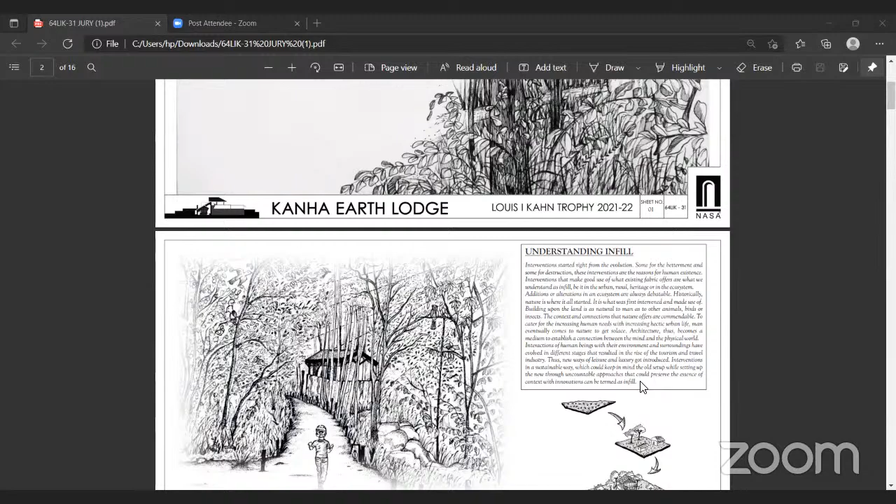Also, the site as an intervention proved to be for the betterment of the ecosystem there.

The reserve forest later got named the Kanha National Park, which led the government to launch schemes for tourism and bring awareness amongst people about endangered wildlife species and the forest. This led to the emergence of several habitable spaces in the buffer zone, amongst which the Kanha Earth Lodge stands as one.

This area lies in the tropical dry region with moderate climate. The humidity can be seen high in August, followed by more precipitation, which is observed in July.

Next, talking about the topography, the site is located on undulated land with minimal but gradual slope in the buffer zone of the Kanha National Park.

Before the construction, the land was barren and was used by cattle for grazing. But today, the site bears over 1,000 different kinds of tree species.

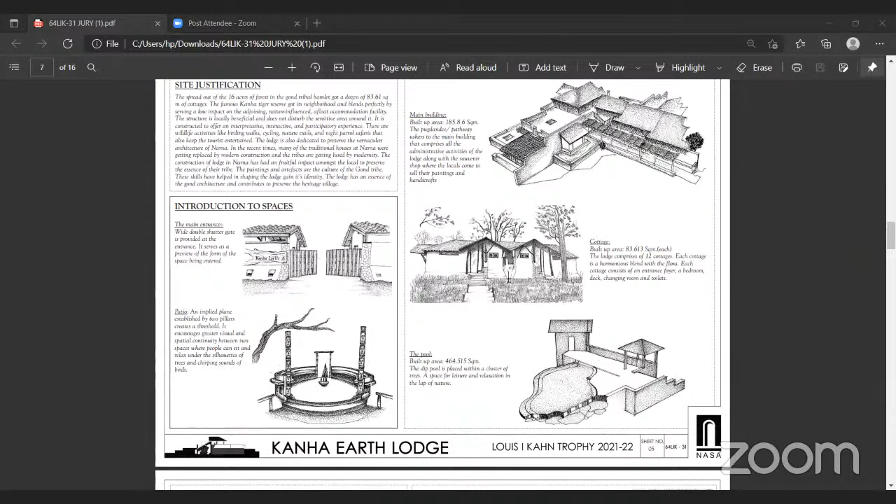The cottages, whose built-up area is 83.613 square meters, the lodge comprises of 12 cottages. Each cottage is a harmonious blend with the flora. Each cottage consists of an entrance foyer, a bedroom, deck, changing room, and toilets.

The pool extends up to 464.515 square meters, the dip pool is placed within a cluster of trees, a space for leisure and relaxation in the lap of nature. Coming up to the main building, which is inspired by the topography of the site

and followed by the principles of minimum cut and fill. The physical form of this building is not dominant but blends well with the surrounding. Here, the spatial organization shows a relationship between organic and inorganic spaces.

Space which is within a space, or spaces linked with a common space or adjacent spaces, shows this type of relation.

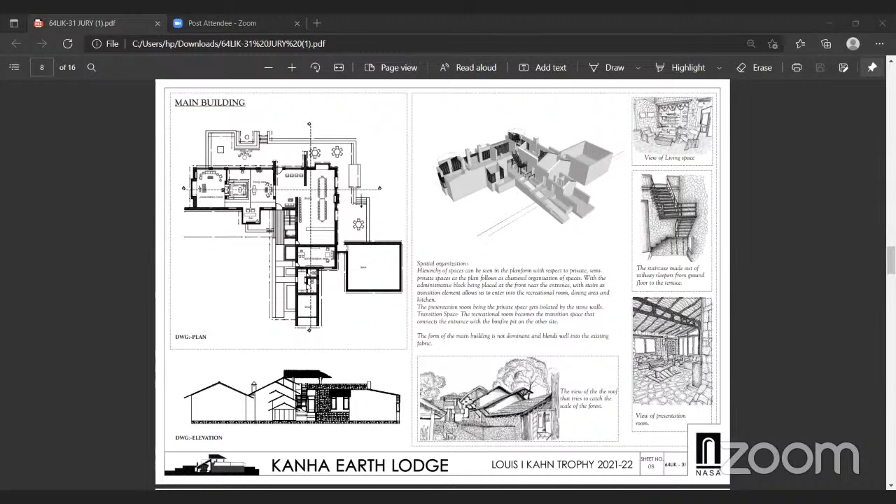Here, there are horizontal, vertical, and sloping planes, which include walls, floor, and roof. Starting with the horizontal plane, which is the floor where it is being covered with stone.

Specifically, yellow sandstone is the material used for the final flooring. These roughly cut stones arranged randomly give a better look. Rather than being uniform, the floor is terraced or spaced to create a differentiation between the spaces.

The vertical plane, that is the wall, is of three layers: the brick, plaster, and the oil paint layer. The sloping planes of the roof also have a series of layers constructed in a manner to protect the interior from exterior intruders.

Coming to the cottages that are 12 in number, they have a prominent feature of sloping roof that welcomes the users, and also a feature that can be seen in the houses of the Gond tribes.

The material palette is same as the above, with the strategic use of strategies starting from orientation. 6 of the cottages face the north side and 6 towards the west.

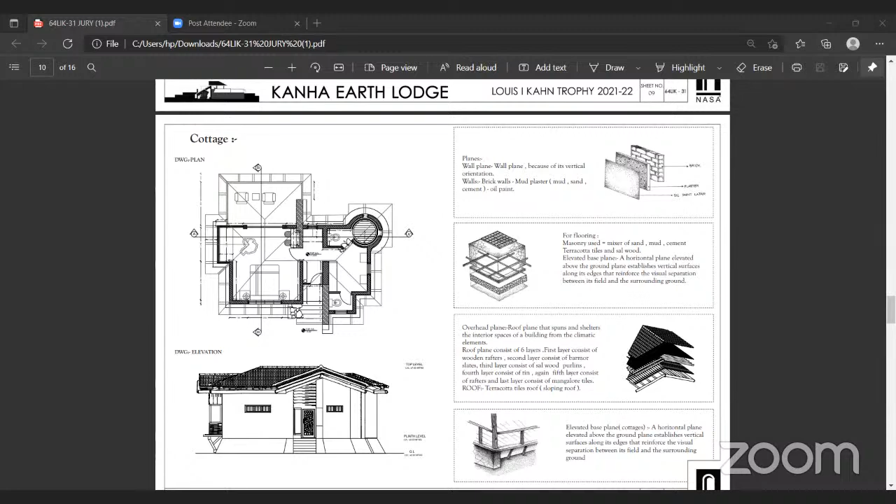This was strategically planned so that each cottage gets the view of the lake. And the harsh sunlight coming from the south and the southwest is cut off by strategic plantations of bushy trees. So the abundant vegetation on the site itself takes care of most of the challenges related to the climate.

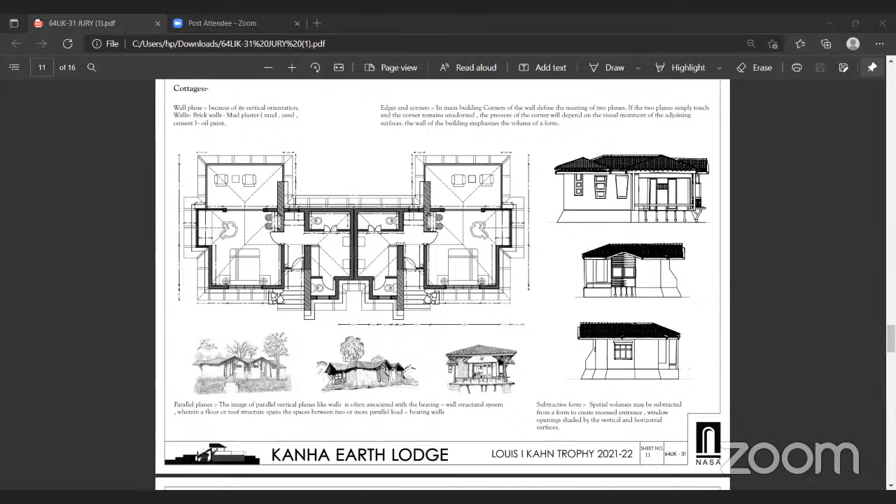The use of recycled materials and materials borrowed from the villages nearby symbolize the vernacular traces in the modern building.

Similar to the manner in which a shade tree offers a sense of enclosure beneath its umbrella structure, an overhead plane defines a field of space between itself and the ground plane.

The structure includes two types of garden, the butterfly garden and the kitchen garden, which is used for organic farming and providing fresh veggies to the guests and the locality.

Here are some of the construction details.

Moving on to the rustic richness of the materials and the blending form with its context, it serves its purpose of luxury as well as solace, and also it stands as a landmark.

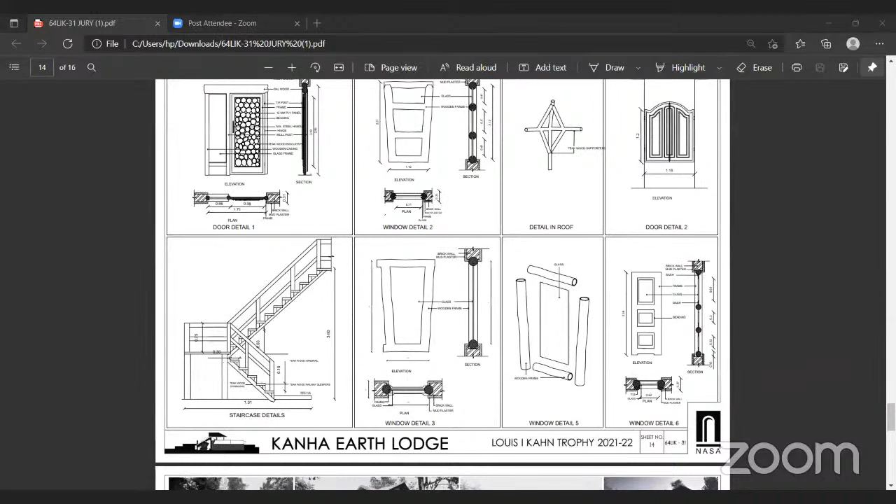We can actually see the RCC construction overpowering the actual essence of the village, but following the grassroots with new innovations could give a sense of novelty and familiarity.

We always talk of including nature into the building, but nature as a context is already there. It is the reality that the building has to face.

So the Kanha Earth Lodge not only respects the context, but also serves and aims to preserve the natural context and the vegetation, the wildlife, and the community that it represents.

So we sum up our idea of infill and conclude our presentation. Thank you.

So we'll start with Brinda ji. Okay, yeah, I wasn't sure. All right, thank you. Thank you guys.

Nicely represented project. What I really liked about the way you presented it was also acknowledging certain factors, like how the RCC overpowers, but yet there are all these balancing elements that are very contextual and responsive to the local culture as well as the forest and the area where it is located. So recognizing that was really significant.

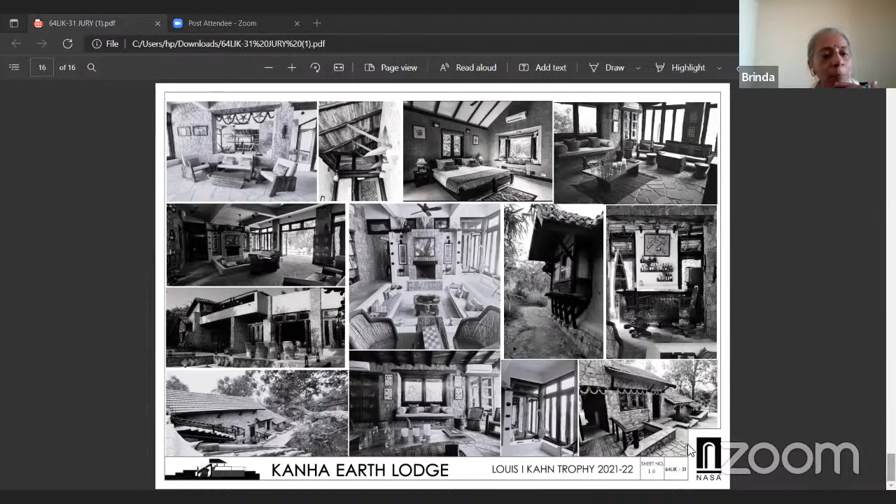Other than that, I've been fairly consistent about asking this question, which is that when you talk about the local culture, are there any other references besides small things represented through decorative features or some other things? Are there any other spaces which are, from a typology perspective, representative of the local? That was the only question I had. Thank you.

So now Parul ji. From the construction technologies, if you could just elaborate a little bit on the walls. You said something about it, but walls and windows, I think they have used all local wood. It looks like it, and roof ceilings, because this is really a very good project selection, as I would go and say that. And it's very well represented by you. Congrats for that. Doing a good job.

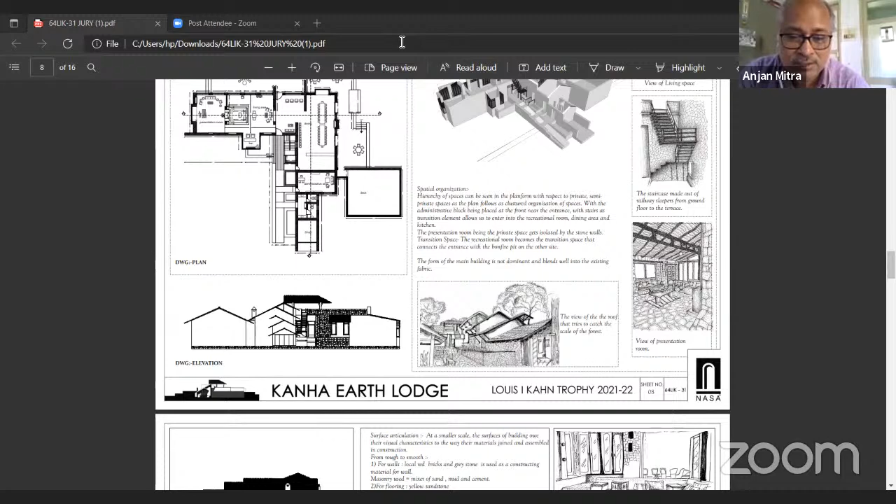And the rest, probably the kind of motifs, because all these tribal cultures have a belief system, and that is normally executed in various doors, windows, motifs, the way they use their utensils, the furniture, the way they actually serve food, and all that. So everything has a purpose. There are some indications that you have already thought about it, and also the name of the local species that they have used. That would have been much more of an interesting repository of tribal cultural knowledge. I think this is a good job.

Thank you. Thank you for the comments. I'll start by answering your question, sir.

The basic idea of the architects Padmaja Srivastava and Deepak Srivastava was to incorporate the Gond community, not to let it be overpowered. So they had this thinking process that the lodge should have certain character to it which will represent the Gond community itself. And also in the construction process, the locals were involved.

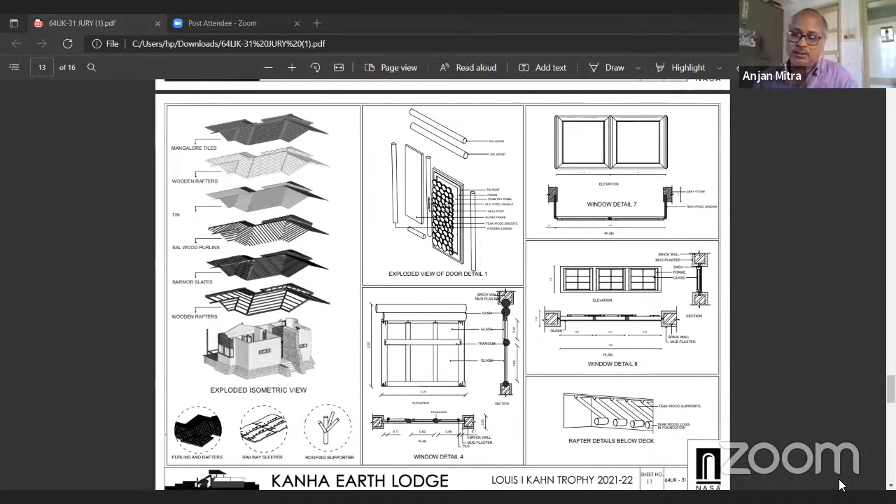I had just one more question regarding the tribe. Did you get a chance to look at any of their settlements?

Yes, ma'am. We did go to the locals' houses, so we got to study and physically document the traditional Gond house. We also provided it in our slide. The house we documented in Narna - this is the actual house there. And you see here, the slope of the roof is much more pronounced, and it is tiles.

Yeah, so this is exactly my point, because the profile somehow doesn't look very authentic or towards the natural profile. That is the only observation that I have, nothing else.

Yeah, but I think when you are dealing with hotels, they do want a lot more safety than just that. And when you're in a national park, I think this would also be a client requirement, I guess.

One more thing I want to say is that whenever you do something like this in rural areas, it really boosts the economy of that place. Not only do these people get employed while making the building, and more of such buildings will come up, but also many times they are employed by the hotels and resorts themselves. That has been our experience - the 5 to 6 villages around that place really start prospering.

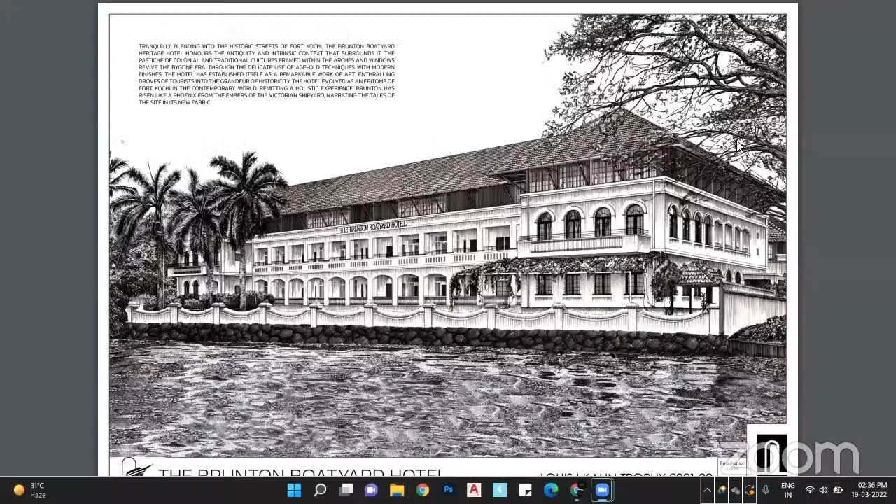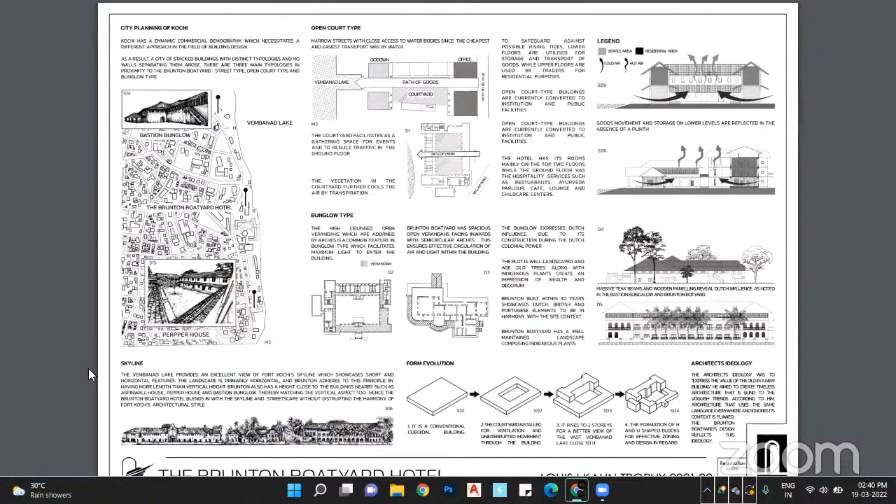Brunton also has an open courtyard type plan. Open court type plans or buildings also show goods on a ground floor, while upper floors are residential in purpose. Brunton also has its residences on the upper floor. The next typology that influenced was the bungalow type, which brought the open veranda and well-landscaped exteriors, which are clearly reflected in Brunton.

And now speaking of the skyline, this site primarily has a horizontal landscape, and Brunton adheres to the site's visual balance by blending along with all the buildings close to it, such as the Pepper House, Aspinwall, and so on. And speaking about the form evolution, from a conventional cuboidal plan, it incorporated a courtyard into its design. And then they raised a two-story to get a better view of the vast Vembanad Lake in front of it.

On the next sheet, we move on to our site. The site is highly accessible from all the transport hubs, and the building has been designed according to the climate of Kochi, which is a warm and humid climate.

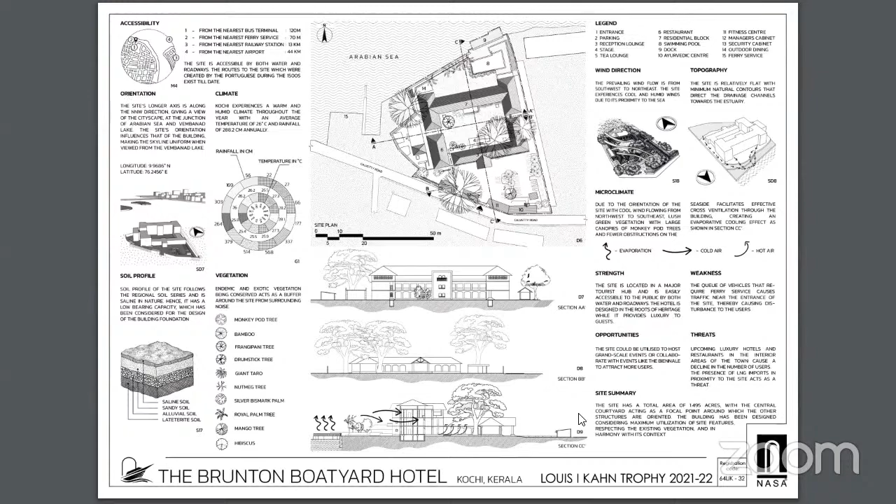The vegetation present in the site influences the microclimate by channeling the northwestern breeze. The site also maintains the monkey pod trees, which were planted by the British, and is also home to various animals like peacocks, cranes, seagulls, and squirrels.

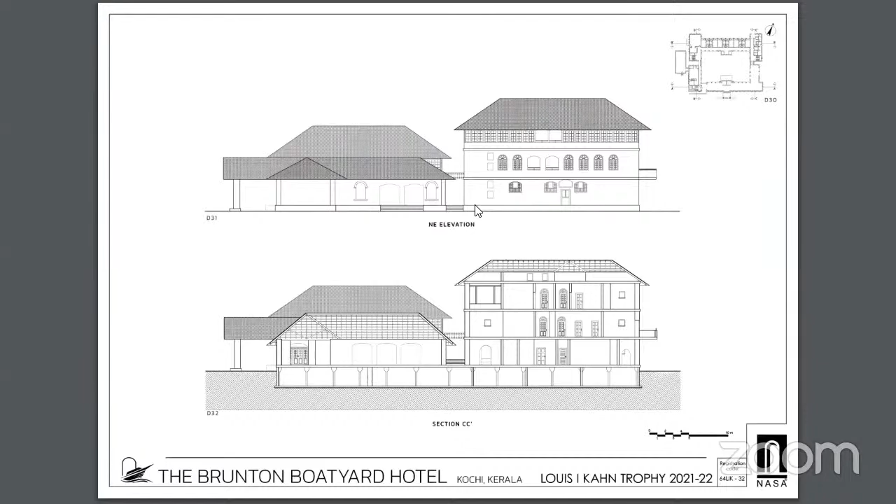Speaking about the construction details, the building has a 60 centimeter thick wall on the exterior and a 25 centimeter thick wall on the interior. The large thickness is provided to give a thermal lag to the high temperature outside.

They have used a slab and drop column for the foundation, which increases the punching shear strength and prevents the failure of the floor.

For the flooring, they have used terracotta tiles and red oxide skirting. These tiles can withstand a lot of stress by resisting breaking and chipping.

They have used arches as well, specifically Dutch style arches, mainly segmental arches and round shaped arches. They have used semicircular arches in the fan lights of doors and windows. Segmental arches are used in the facades and the entrance portico.

Then they have used lowered windows, which is also Dutch style, as we mentioned earlier. Then there's a roof structure.

The roof uses mainly two kinds of trusses, king truss and queen truss. The king truss is used on the lower floors, while the queen truss is used above because it has a wider span.

They have used cast iron expansion strips to compensate for the expansion that can happen to the building due to moisture, to prevent cracks from forming. They have also used soundproofing to shield it from unnecessary noise, as it's near a jungle.

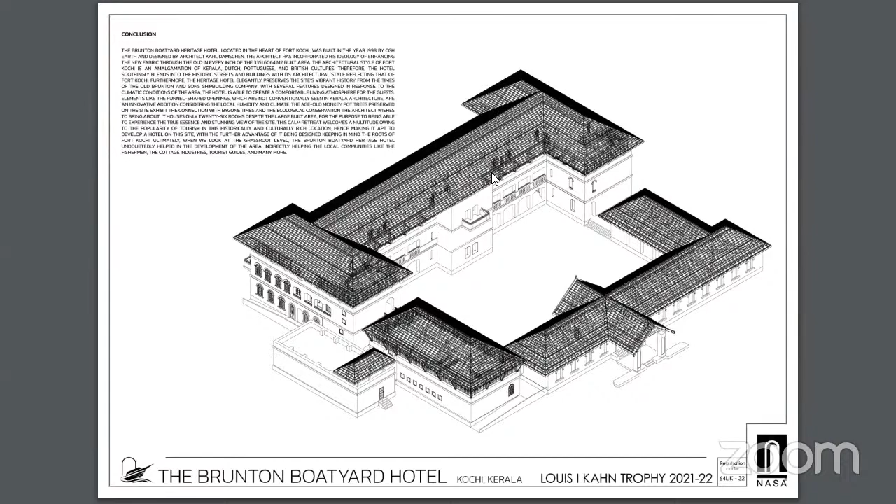The moment we stepped into the lobby, we were transported back into the colonial past. It felt as if we were not in a bustling town of the 21st century. We could learn about the importance of infill architecture and how a building does not have to be completely unique to be remarkable. When we look at a grassroots level, the Brunton Boatyard Heritage Hotel undoubtedly helped in the development of an area, helping the local communities.

Thank you, sir. Thank you, sir.

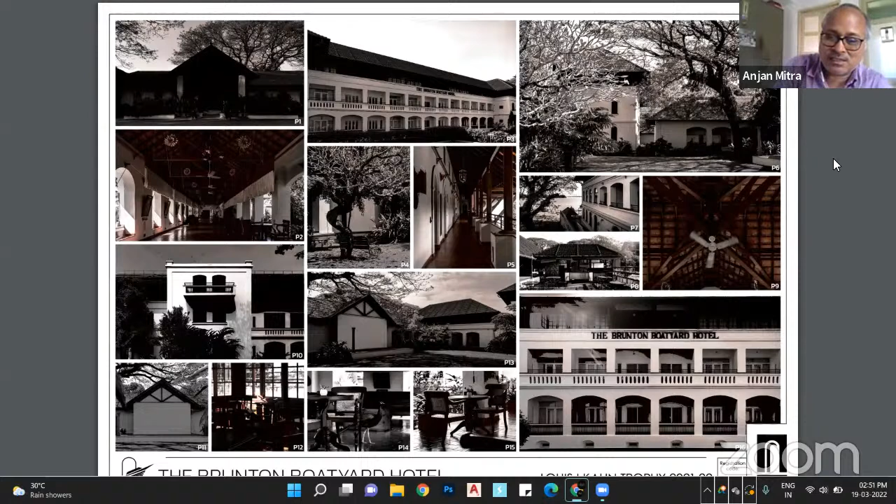How have they tried to cope up with new trends like the AC or other services, that intrusion that has actually gone into a heritage fabric? Even the lighting and electrical systems, these things were not there originally. So how have they incorporated that within this very strongly defined heritage fabric? This is something one needs to know, because these will be the yardsticks for the future of architecture. So I'll just stop at that.

Thank you. Thank you, sir.

Okay, nice building, and I think good representation. Most of what I wanted to say has been said. I have just one more thing: did you manage to see this? I'm sure you would have, but when you were documenting this, did you see this building from the water side, like from the lake side, and understand how it contextually fits within the skyline?

I'm sure you've seen it many times, but I didn't see it represented in your drawings. So I was just thinking that might be another way of looking at contextual representation of this, or rather the contextual kind of fitting of the insert within the skyline of the place. It might give you a slightly different way to strengthen what you're saying about the building. It's definitely fitting in very well, and we all know it, we've seen it. So I guess that part could have helped you by stepping away and looking at it from the water. Okay, that's it.

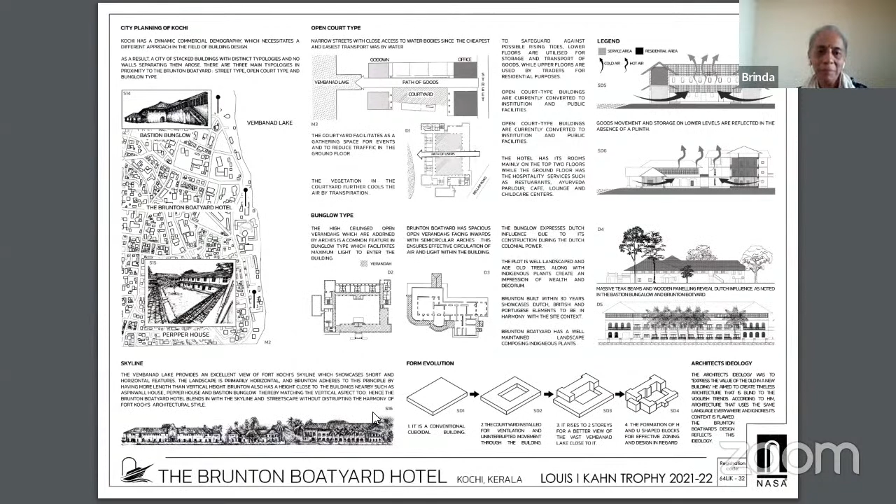Yes, ma'am. Speaking on the skyline, mainly if you see from the Vembanad Lake side, all you can see is a horizontal aspect of it. There are no vertical huge skyscrapers or anything. So mainly what the architect focused on was bringing these aspects. If you compare it with buildings close to it, like Aspinwall House, those buildings are majorly horizontal in structure. They have even incorporated that large sloping roof, a Dutch feature, to conceal the top floor, so it just looks like a straight horizontal line.

Okay, thanks. Hope I answered your question, ma'am. Yes, thanks.

Next, about the changes that occurred in the hotel according to the times. Actually, when the hotel was designed, it did not have soundproof rooms because beside this hotel there was a ferry. It was a Jangar ferry before, but later they transformed the Jangar into a Roro, which could move both forward and backward. The Roro was really loud, and that was a disturbance to the residents of the hotel. So, in order to cope with the sound level of that time, they introduced soundproofing to the walls so that residents could completely enjoy their stay without disturbance.

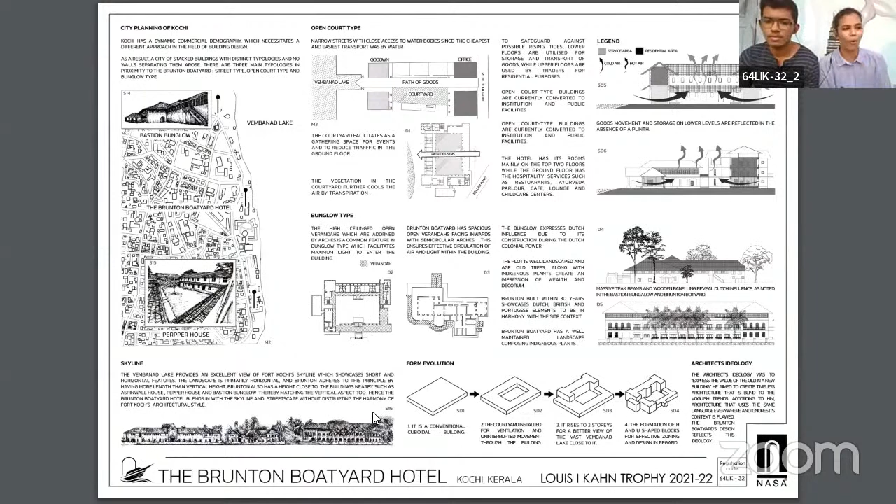Yeah, that's true. And the ego of the architect is not established here. The style is not established here, which is part of our Bauhaus traditions and modern architecture and postmodern architecture traditions. Yes, ma'am, we don't want that. We just want to show that it's here. Yes, ma'am, and look at the harmony that it has maintained. Isn't it nice and pleasing to be around this place and walk down the streets or even go on the boat ride? What does it feel like going to other cities where you just have one skyscraper competing with the other, and you have a nice low traditional building, and then a glass box that heats up like a cold tea, where you first heat it up and then you cool it.

Yeah, this is so true. Yeah, and even the verandas, they're so nice. Actually, when we were there, there was no soundproofing and I did not mind. We stayed there for 2-3 days. But I know, especially when people come from abroad, they have issues with sounds.

Actually, in our first cover sheet, we've taken the view from the lakeside. When we met the architect, he mentioned that while designing, during the initial stage, he viewed the site from the lake side so that he could get an idea of how the building would fit into the site and into the context. So this is why we thought of including this view in our cover sheet, because it's a really important view for the building.

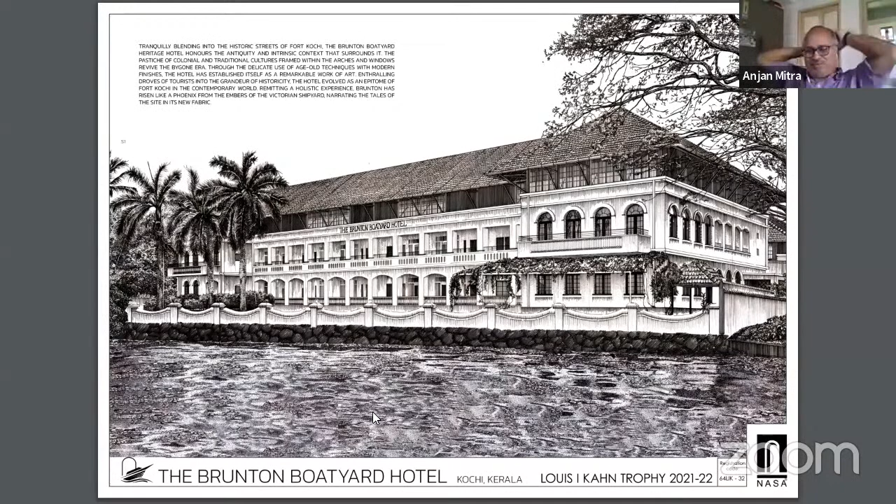You started with this, I clearly remember, but when you were explaining the building, you didn't go back and look at the details of the building again. That would have completed the thing. No, but that's fine. You explained it. That's fine.

Even the furniture and every detail in this building goes back to colonial times. Yes, ma'am, there are actually old fans called pankhas in the lobby, which are reminiscent of British colonial times. There's a picture, I can see Parul is so nostalgic.

Yes, and especially to find something like that, we did not expect it to be. We had not seen any previous views.

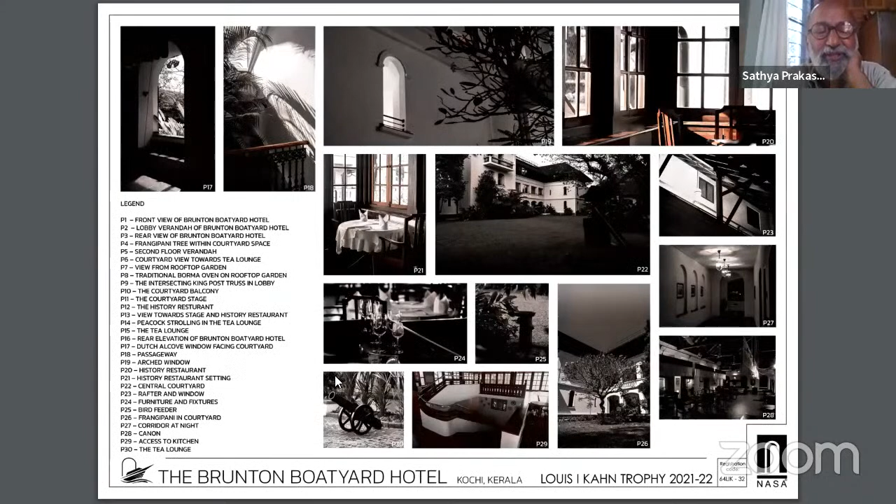Incidentally, while some of you are discussing, I was quickly checking out this architect, and I've heard of so many of his projects. I've been to two of them, the Kashi Cafe and another one, but I never knew it was this guy. I knew it was done by a foreign architect, but never bothered to find out who. Same CGH group, amazing work.

Amazing work. I mean generally, I'm not referring to your entry, student, I'm referring to his works in Kerala. The sensitivity he's brought, being born in Switzerland, Germany, and finally what he brings to Kerala, that's really surprising, which is rare. I guess, Satya, it has to do with cultural sensitivity, because he came from Switzerland and this is almost like a Dutch building.

Even the imagery of this thing, if you really see the first shot, it's almost like a ferry, you see the float and other things, it reminds you of that, the length and spread of the thing. It's almost like... but there are other projects of his. Of course there were some colonial hangovers, but there are other projects of his which have a character that is equally rooted in the local ethos.

No, that is it, the Kashi Cafe, blended it well. Yeah, he's blended well, and he's done a lot of restoration projects also, the synagogue - I've been to the vernacular, the Cochin synagogue, the Kashi Cafe and all. So it's now really I'm connecting in a different way, if not like the way Parul did. Anything more on this?

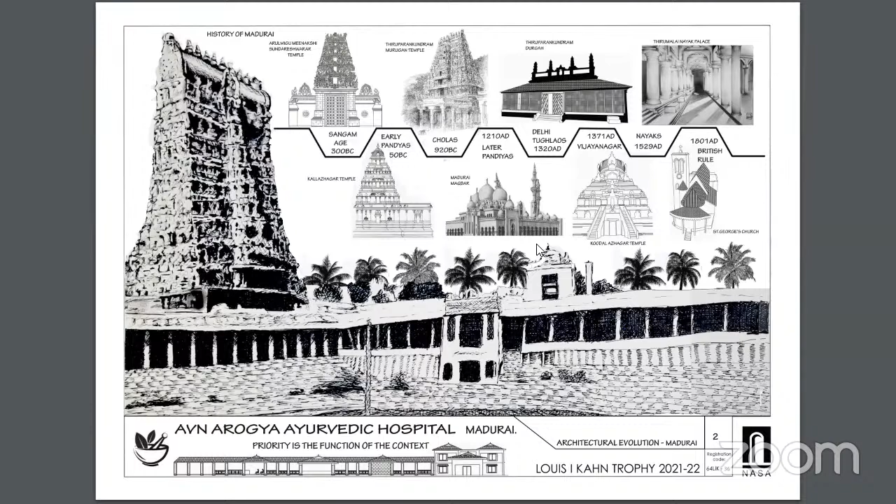Next, the brief interpretation: after globalization, the construction industry has developed in an incredible way, which gives us spectacular heritage buildings that must be conserved now. Most buildings in the conservation area are facing a dramatic situation. On one side, heritage buildings should keep their architectural, historical, aesthetic, as well as social values, but on the other side they must be developed based on real market demand. Infill building should be the solution in making a respectful contemporary contribution to the conservation area. Infill building is based on the sustainable conservation approach, so the development solves not only physical problems but also non-physical ones.

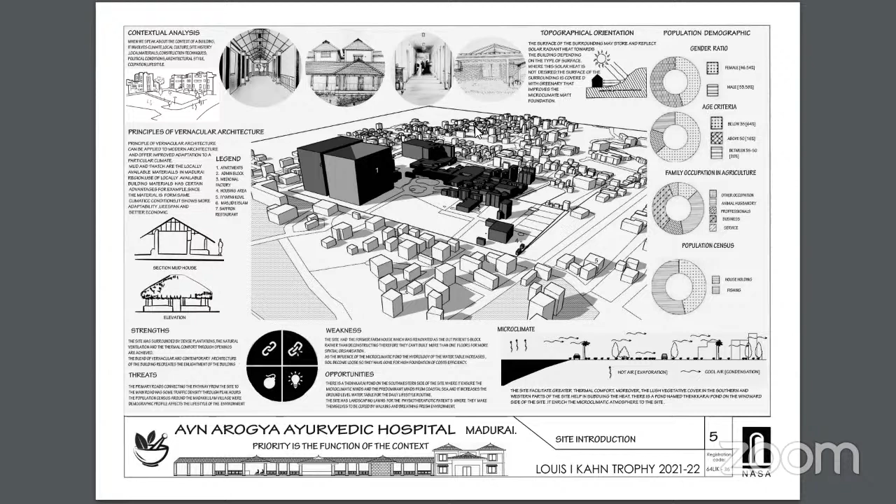Site introduction. The AVN Ayurvedic Hospital is situated in Madagulam village of Madurai South Taluk. It is an Ayurvedic hospital and science medical center of this locality, a complex comprising various buildings with varied characters, each having their unique essence and serving different purposes. They have developed this site with lush vegetation and sustainable techniques of approach to the site-rich context.

AVN is the evolution from phase 1, 1920 to 1970. It started from this Varior community. People from this community were involved in Ayurvedic medicines. In Kerala, there was a college named Ayurveda Padasala, where Rama Varior did his college studies in the 1920s. After he came to Madurai, he rented a house on Town Hall Road.

The house was designed such that the ground floor was his hospital and the first floor was his house. His wife used to prepare medicines with Rama Varior's guidance. With those medicines, the couple started the clinic and the pharmacy.

Phase 2, from 1970s to 2010. At that time he came to know there was a 15-acre site in Tenkarai. He decided to shift to Tenkarai, a rural place with nature, connectivity, and peacefulness. Being Rama Varior, they were not satisfied having their clinic in the heart of the city; they wanted a site well connected with nature, doing justice to their profession.

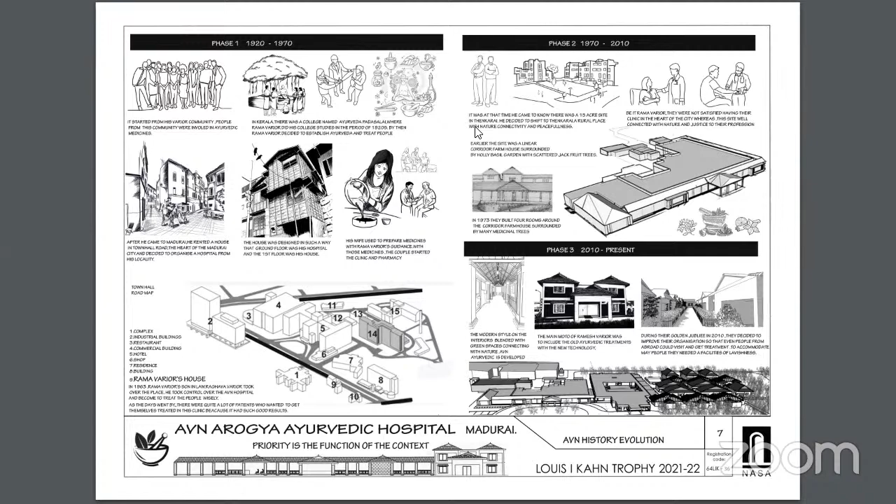The main motto of Ramesh Varior was to include the old Ayurvedic treatment with new technology; he wanted to give it a modern touch. Likewise, he designed the building to be contemporary architecture with a lot of modern architectural styles, blended with greenery spaces outside. The building has a lot of open spaces connecting with nature. So this was how the AVN Ayurvedic Hospital was developed.

Admin block. The total structure comprises specialized doctor's cabins and combined consultation rooms. They have segregated the semi-public and public zones by the method of an open courtyard, where the climatic impact results in the building's functionality. It acts as a node of interaction, like an open-air theatre, to hold functions and to fill the gap of mental health.

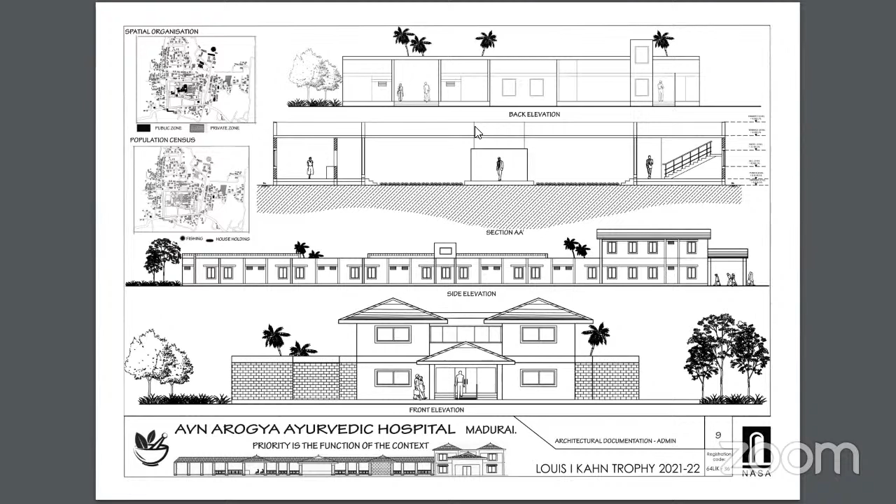Cottage 1. This cottage is influenced by both vernacular and contemporary architecture. The spaces flow from public space to private spaces, while the outside space at the entrance, surrounded by the landscape, is inspired from vernacular architecture. A seated space is provided as a cross-reference to the Thinnai in vernacular architecture.

You still have 2 minutes to finish your presentation.

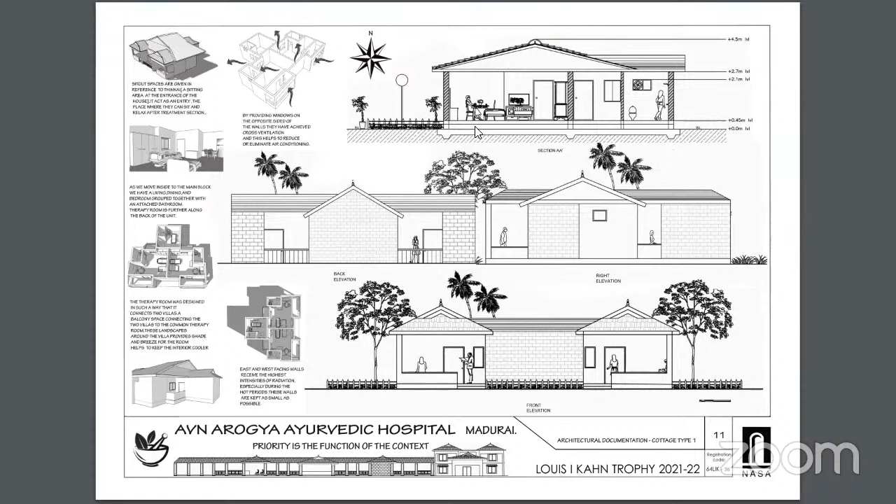Sustainable techniques: materials used were locally sourced, making use of skilled local labor. At the site level, they have gone for solar panels and rainwater harvesting methods. At the building level, they have used Mangalore tiles and bricks. Bricks are made from the site, naturally brought from the nearby village, and the roof tiles were taken from existing farms on the site.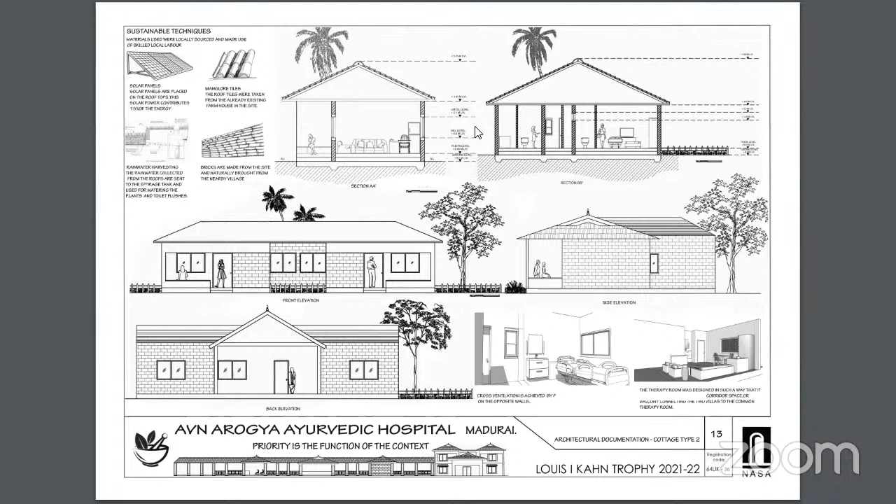Cottage type 2: they have a royal suite villa where customers who need privacy and individual space can stay. The touch of modern architecture is seen as the thatched roof is replaced with a sloped roof with Mangalore tiles, the false ceiling with an RCC slab, and mud walls replaced with bricks, and so on.

On site, they have constructed using a traditional method. The mortar was produced with traditional chuna, with the stone rotated by bullocks, and lime pasted walls. Walls with thermal insulation provide soundproofing materials, giving a sense of solidity and permanence to the structure. Next.

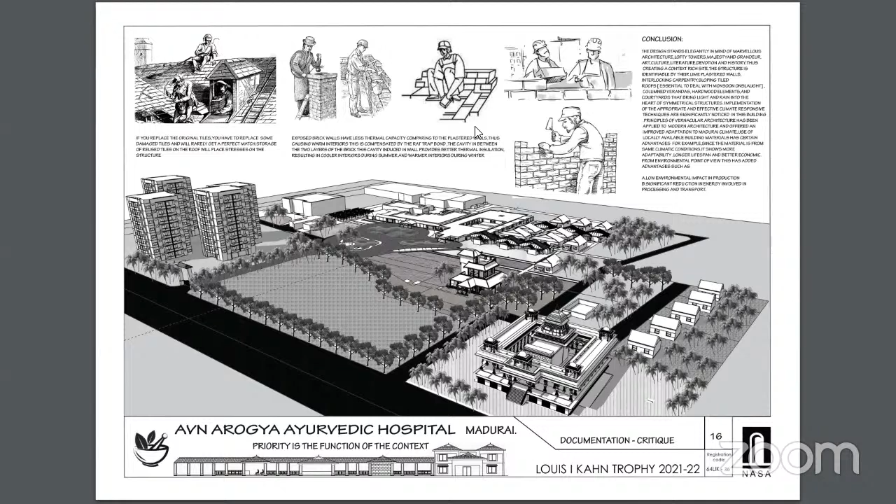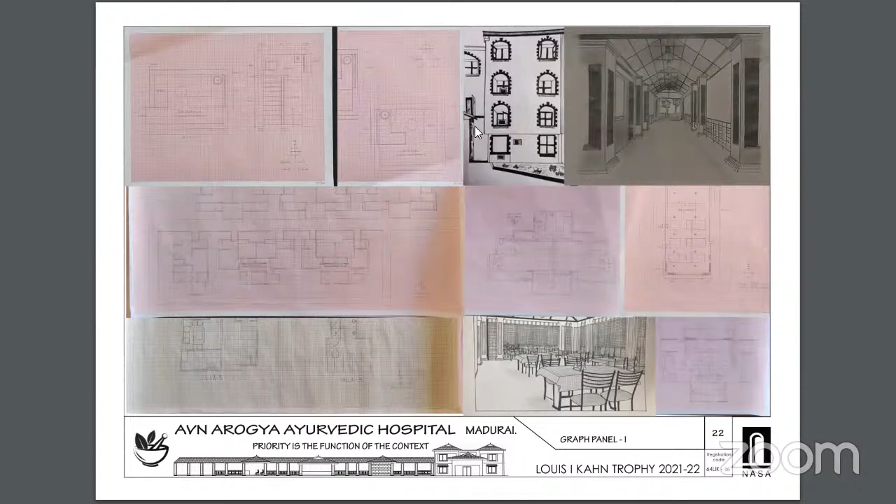And these are the documentation sheets where you have sketched on site. Thank you. Thank you, sir. Thank you.

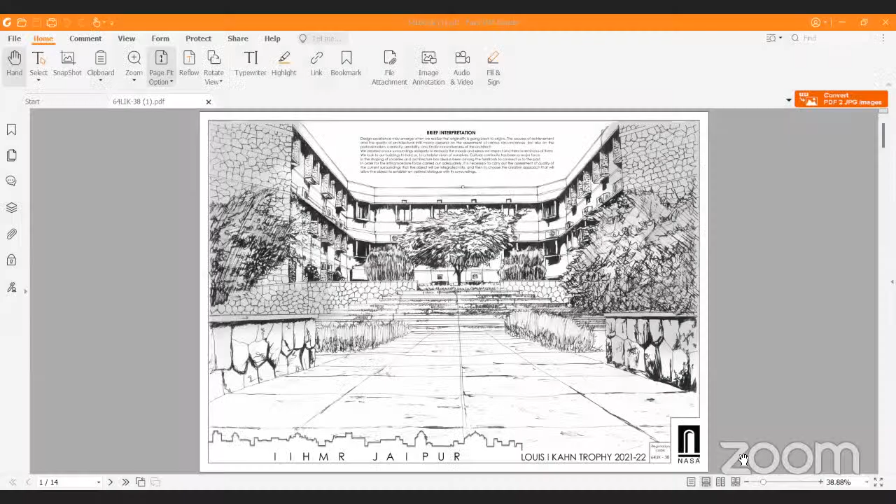A very good afternoon to everyone present here. Cultural continuity has been a major force in the shaping of societies, and architecture has always been at the forefront to connect us to the past. With this ideology, for the 64th LIK Trophy, we have selected and documented the Indian Institute of Health Management Research, IIHMR, which is situated in the city of Jaipur, Rajasthan.

The 14.37 acre campus was designed by architect Ashok B. Lal and Associates in the year 1988. It is located near the airport at Sanganer on the outskirts of Jaipur. IIHMR was established and registered as a non-profit society in 1984.

The project was the winning entry of the closed competition for the design of IIHMR, which was further nominated for the Aga Khan Award in 1988. It was completed in 1991. Later, in 2020, the institute submitted a proposal to the state government for the establishment of a private university.

Ashok B. Lal united all the stonemasons of Rajasthan to work on the project. But as there was a shortage of stonemasons, he started teaching construction techniques to the local masons and completed the work.

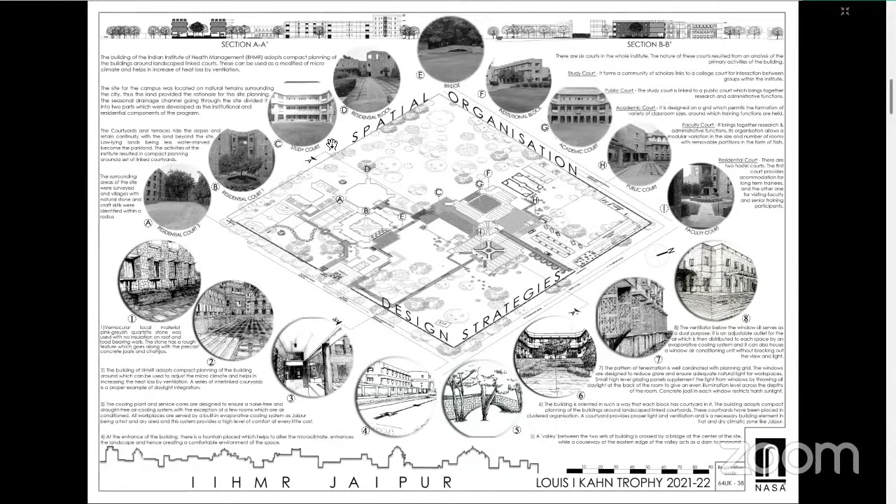The landscaping can be seen on the extreme corners of the site, done with respect to the climate of Jaipur. The main campus consists of 2 blocks: the academic block and the residential block.

The academic block further consists of a computer lab, a library, a documentation room, a management and development program center, an auditorium, conference hall, and seminar rooms.

The spaces are interconnected in such a way that short routes are created, reducing travel time. The architect blended spaces using a sustainable approach. The architectural characteristics of the campus ensure better productivity of students through the intentional use of neo-vernacular principles.

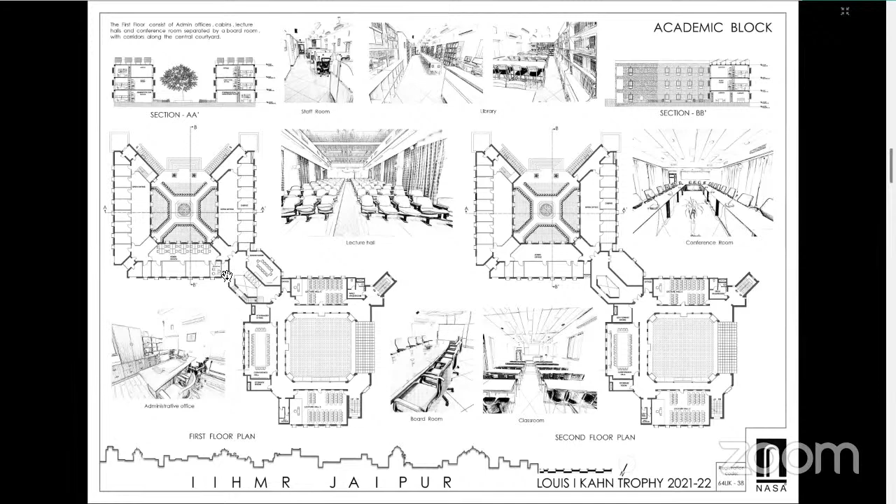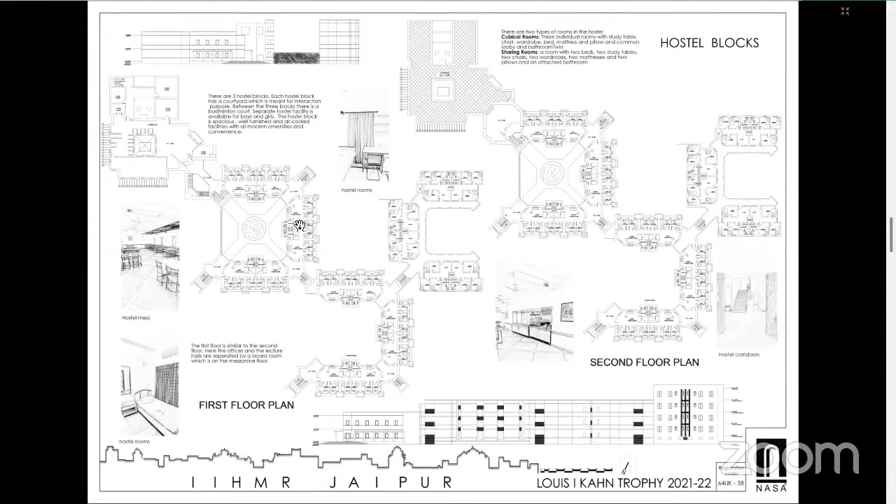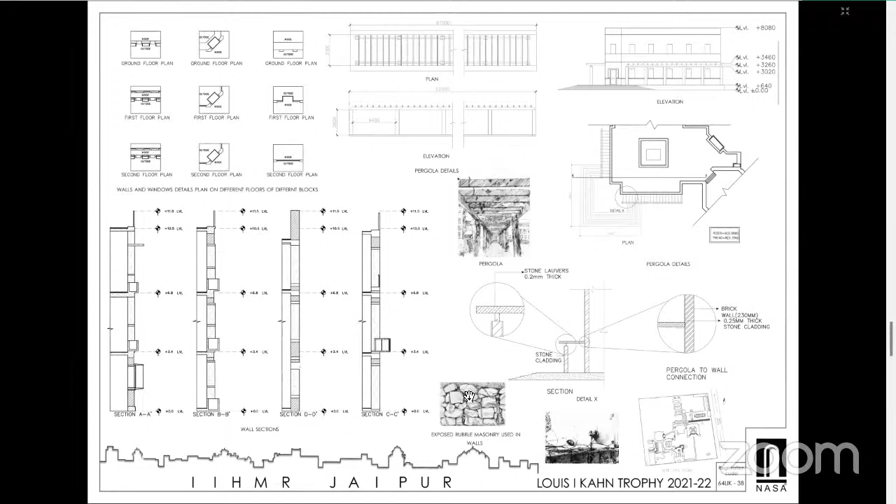There are 2 stone concrete bridges constructed over the leisure valley, further covered with tiles as the flooring. A large fountain area is created at the entrance of the campus that supports the landscape as well as creates a pleasant environment for visitors.

The main entrance of the campus is through the northeast corner. A large fountain has been placed that emerges along with the parking. The main entrance leads to the 2 academic blocks, which are interconnected with pergolas, and on the south side are the hostel blocks and the public courts.

These are some of the on-site photographs.

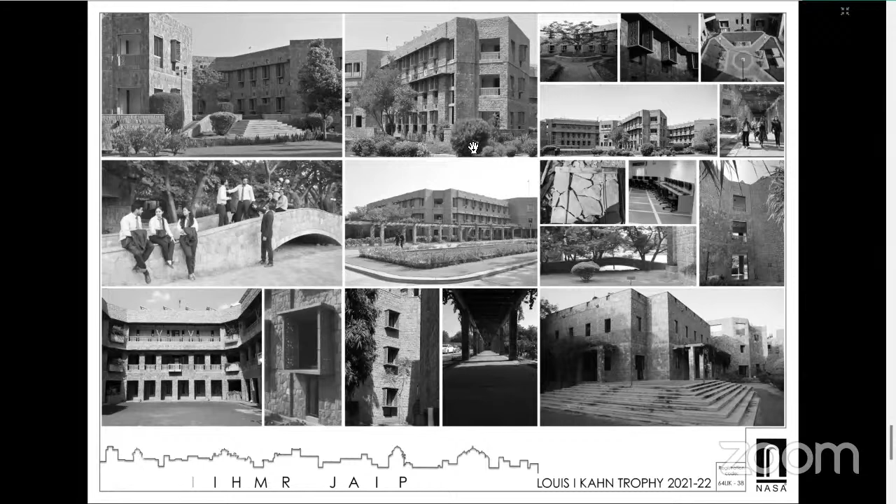In these, horizontal bands of concrete on the elevation give a vertical scale to the buildings while stabilizing the whole masonry. Custom designed precast concrete jalis are held between precast chhajjas and sills.

The entrance lobby has a touch of opulence with a marble floor and marble jali balustrades, and the main staircase perambulates around the double-heighted space, giving it a grand entrance.

The essence of the expressive qualities of the institute is found in the stone used here. And it is here that we can begin to unravel some of the interactions between design thought and its implementation when applied in practice. The campus is situated in the hot semi-arid climate of Jaipur and exhibits the adoption of passive cooling strategies.

To maximize the use of local resources, the design has drawn inspiration from the traditions of local architecture as well as the city's craft. It also utilized the existing landscape features and served it as a primary focus for interaction for communities.

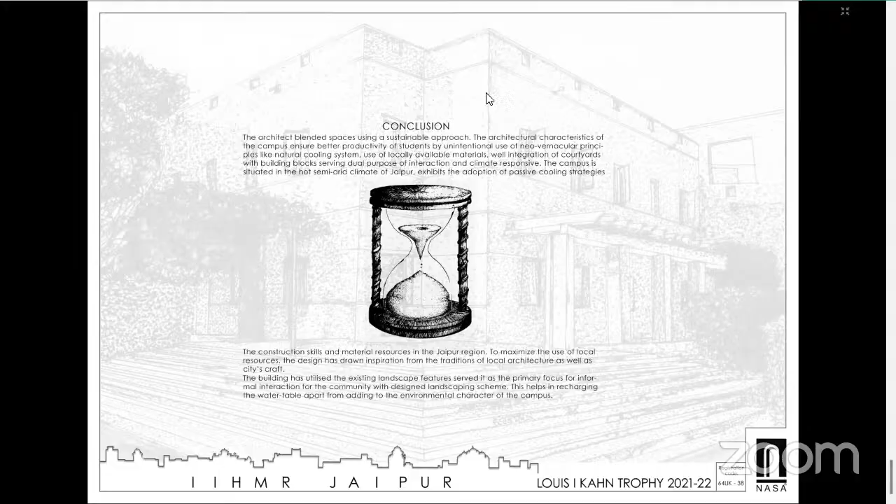So we'll start with Brinda. Okay, I went first last time. I thought it was Anjan's. Yeah, we mixed up last time. So we can go with Anjan this time. We can begin with Anjan. Yeah, I don't mind either way. Okay, so Brinda, will you start, or? Go ahead, please go ahead. Okay.

So now that you have studied this building, I would really like to see the kind of things that he has done. What is really the performance of this building, and the kind of design agenda that he sets in?

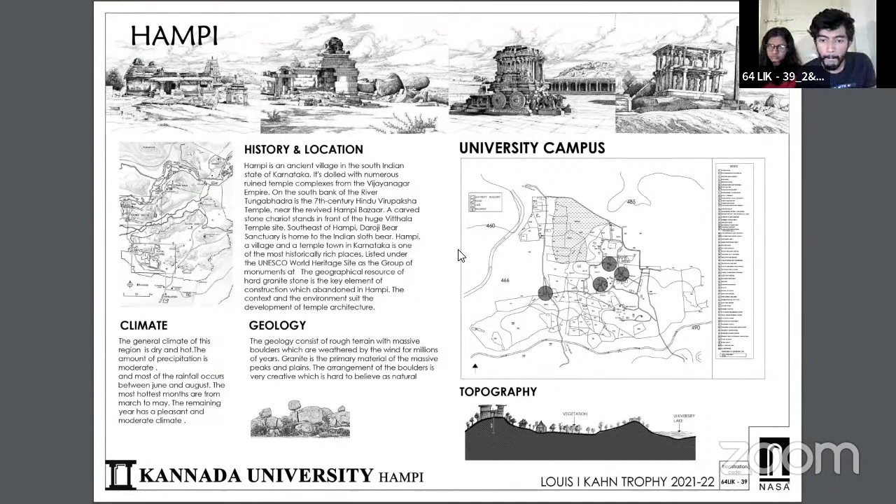Also the evolution of the site we have taken, that is the Kannada University, was firstly situated in the Vijayanagar kingdom located in Hampi, at the Virupaksha temple complex, which is again a World Heritage Site located in the same area. The university was initially located in the Virupaksha temple complex, which consisted of the market area and the colonnaded mandapas around it. In such mandapas the university was initially situated, but after some time, due to the presence of the Tungabhadra river in the vicinity of the temple complex, it was flooding.

Every season of the monsoon had floods in it, and that's why the working of the university was disturbed every time. So in 1993 it was then situated on a new site, which is the present site, south of Hampi.

Coming to the next sheet, the brief interpretation: infill, or fill in, as we can say, architecture is not just erecting structures, but designing a structure which fits in a scenario or the context behind it. That's very important. But in today's world, as I said earlier, the trend has become very vital, and designing the new has also taken overpower over the local or conventional architecture of a particular area.

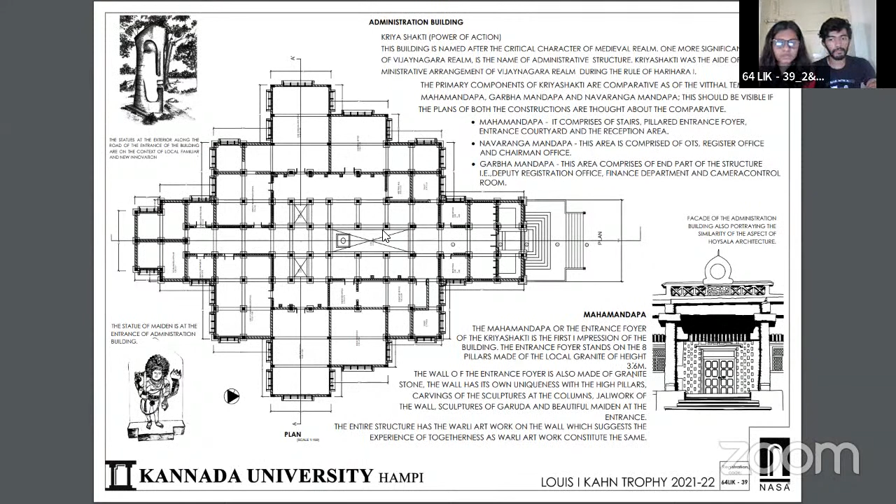Keeping in mind the structures, the whole structure of Kannada University stands on pillars. Pillars are the main aspect of the whole structure because in Hampi, most of the structures stand on pillars and play an important part. These pillars are particularly made of granite boulders, which are regionally found in Hampi itself.

So here we can say the arrangement of the pillars or the pillared mandapa halls, and the beams are also of stone and granite. Some jali work has also been done, which resembles the Vitthal temple architecture. Here we can see a 3D view of the admin block.

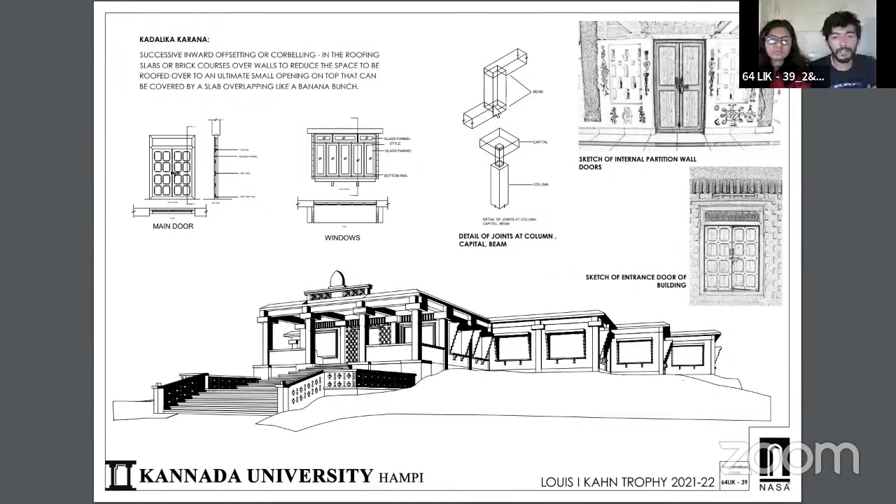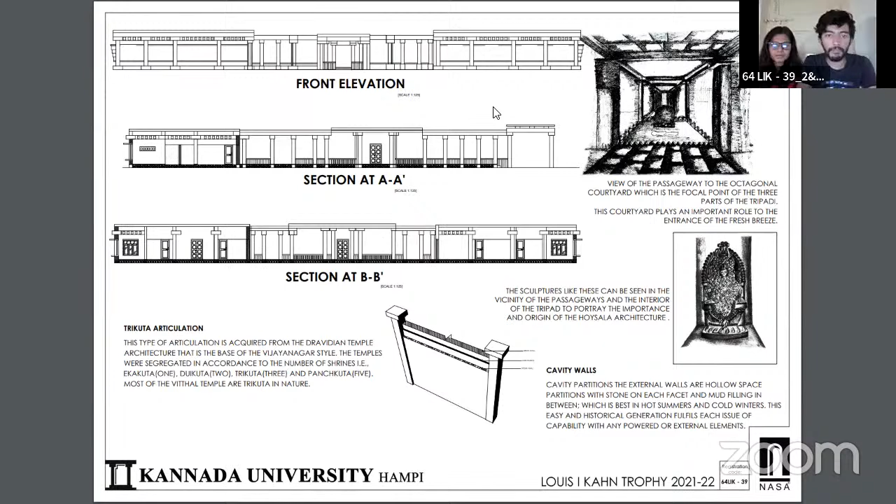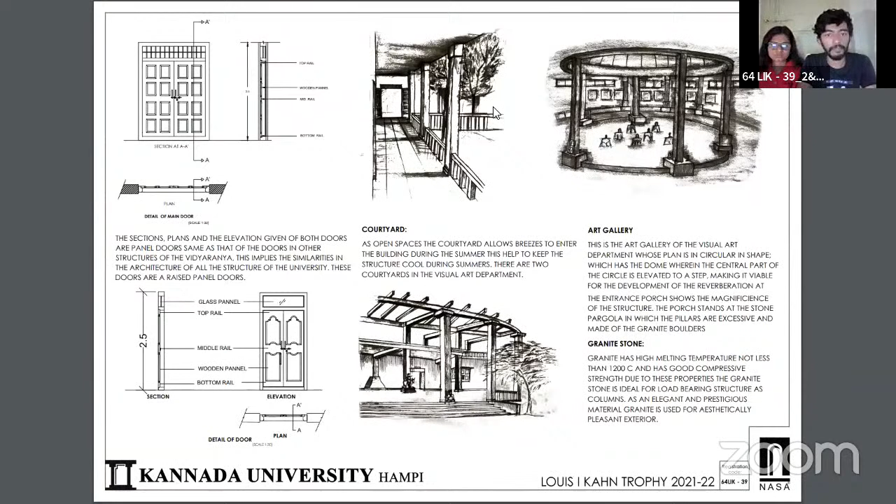After this, this is the fine arts department, which is also based on some Jainism style. We can see a torana built just at the entrance, and the structure is also a staggered square plan. These are the sketches, and there is also a deepa stambha present there.

This is some tribal art done on the fine arts building, and the plan we can see in this sheet is the building adjacent to the fine arts building. This resembles the local elephant stables present in Hampi, and these are the window details.

This is the canteen present there. The use of courtyard has been very well done in this building, and the vegetation present in the local area is planted here - that is neem and mango trees, which enhance the atmosphere in the canteen.

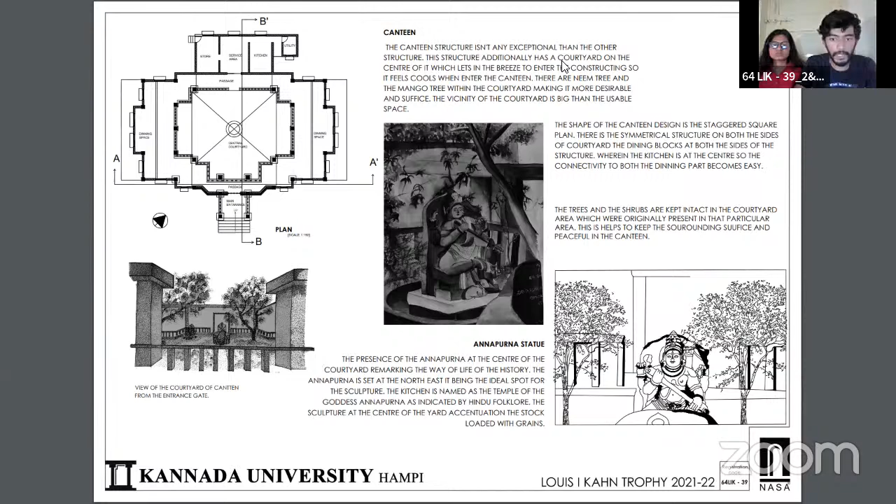The plan is also based on square planning, which we can see in the local area and the temple architecture of that place. These are the sections, and a steel truss is used for the roofing of this structure.

This is the open amphitheater, called Navranga, based on the king's meetings where he used to gather his ministers. The same concept has been used here, and the ornamental stone pillars create a beautiful scene or backdrop for the performers.

The use of natural contour has been done very beautifully, which we can see in the section - the natural contour has been very beautifully used and utilized. There's also a basement for the stage where the performance can get attached.

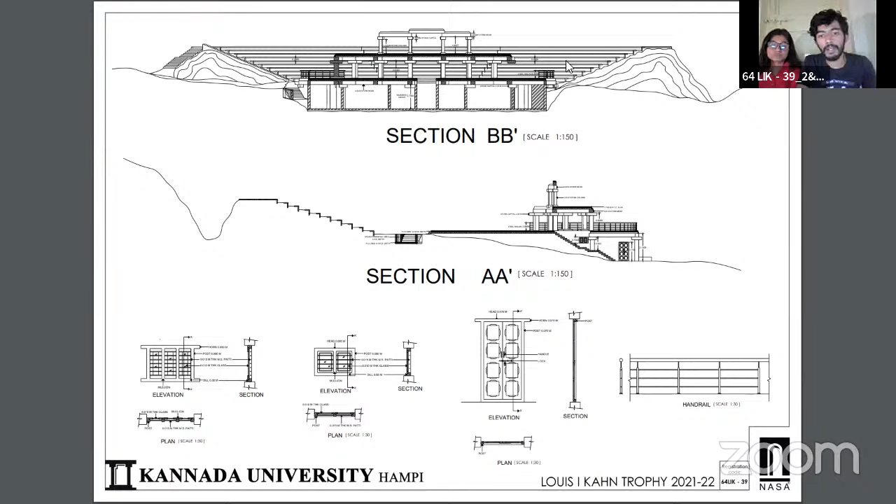Here we can see sketches of it and the tribal art. Scroll down the sheets... yes, sir.

Yes, sir, this is the last sheet, the conclusion. We are confident that in today's world, as we go for the newness, the local architecture, which is developed with the flow of human nature, is kind of diminishing. So there's a very good need to nurture and preserve this.

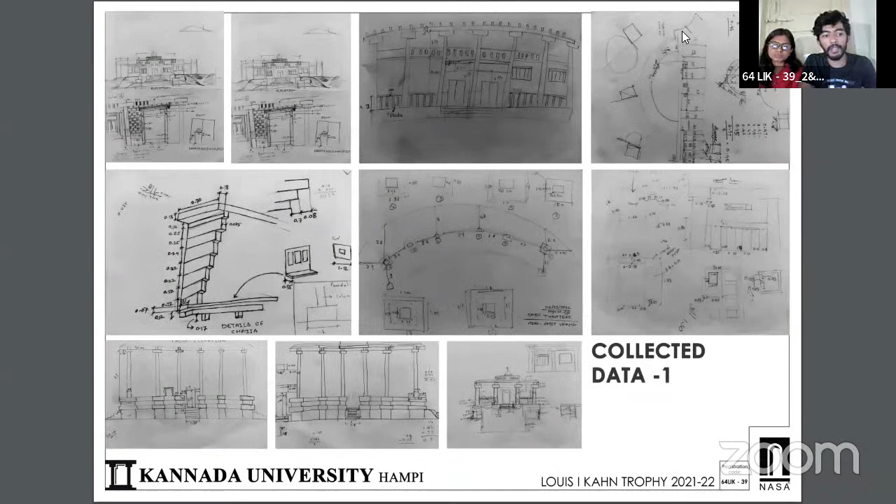Thank you. Yes ma'am, thank you, that's the last slide. Thank you, so we'll start with Parul Ben. Yes ma'am. Last time, no? Anyway.

Instead of going into the entire complex of the university, I had just analyzed a couple of buildings and gone into the details of the construction techniques, why this kind of plan, and how it helped climatologically, and where the stones came from, also encircling and talking about how local this was, including the craftspeople. Yes ma'am, have added to your learning.

So why did we have these kinds of plans? And why the height, and what were the proportions that they worked with? Because all these things are what make the buildings look harmonious. And like you kept on saying that it was very traditional, agreed, you used local, but again you need to understand why and what. And that's what I feel the LIK is for.

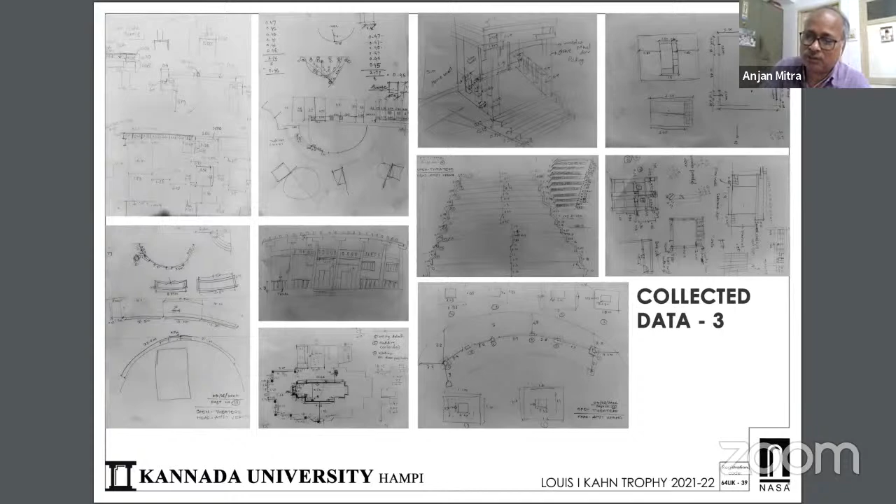This is Ganapati Sthapati or Sompura. They are actually doing it day in and day out. So what is there? Because they have the whole traditional knowledge, building systems knowledge, every contextual local material knowledge, which you don't have. So your purpose of studying this is primarily to get in there, to understand that knowledge and the learning of that system. Where is that?

Because when you have selected this, you should actually know exactly what you are looking at. Next time, always look at it sensitively. That's all.

Okay, I have a slightly different type of comment for you, or rather a question. While you may have received lots of comments on how you could have looked at the architectural features and then, instead of just talking about similarities, analyzed it more deeply, I can add one more aspect with respect to the scale. The scale at which temple architecture works and the scale at which these institutional buildings work are fairly different. You can't expect it to be similar. So if you had compared it from that perspective, the spatial qualities within the building itself.

But to add to that, what I was looking for was, anybody who visits Hampi will know that there is an experiential quality to when you walk from one of the buildings, like the temple, the Virupaksha temple, to the Krishna temple, or to any other, to the stables or wherever. There are pathways, and it is the experiential quality of walking through, or however you go, whether you're on a bicycle, typically people bicycle in that area. So that, and how do you negotiate with the area in terms of the site, the levels, the topography, the views, the hill, the whole aspect of that experience.

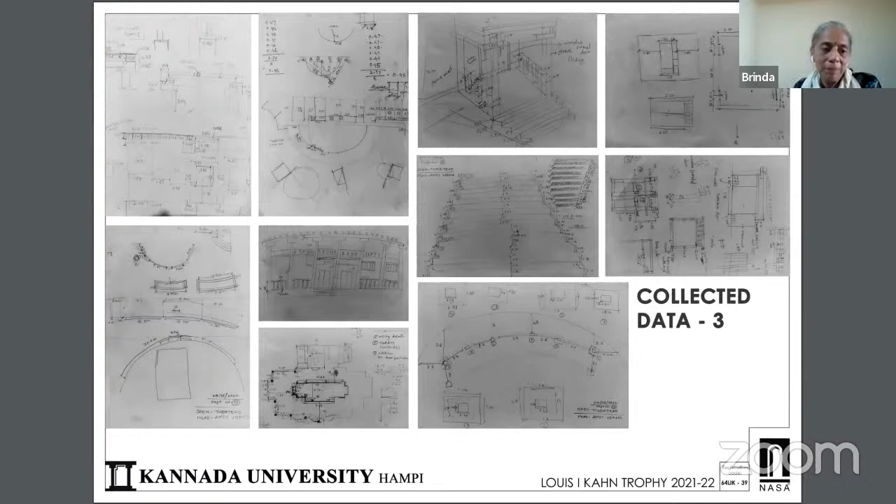So that's it. So the students can answer now.

They can. Yeah ma'am, who were the architects? I've just a quick query, who were the architects for this?

So there were various architects, and mostly they were from the local area, the artisans and the workers. They used the local workers present there, and also the material is of a local style, also the stone. I got my answer.

Carry on for others. So about the kind of planning which is done here, as we visit Hampi or the surrounding area, most of the structures are traditional and cultural. So that cultural context has been used in the university and also the traditional aspects of it, because it's an institutional structure, and there is a connection between the teachers and students in the university.

The same culture which was present in the Virupaksha temple complex, the older university, because in olden times the temples themselves were the knowledge spreaders of that time. So they tried to inherit or propagate that tradition. That's why they have selected that kind of architecture, and they have built the structures on that context, ma'am.

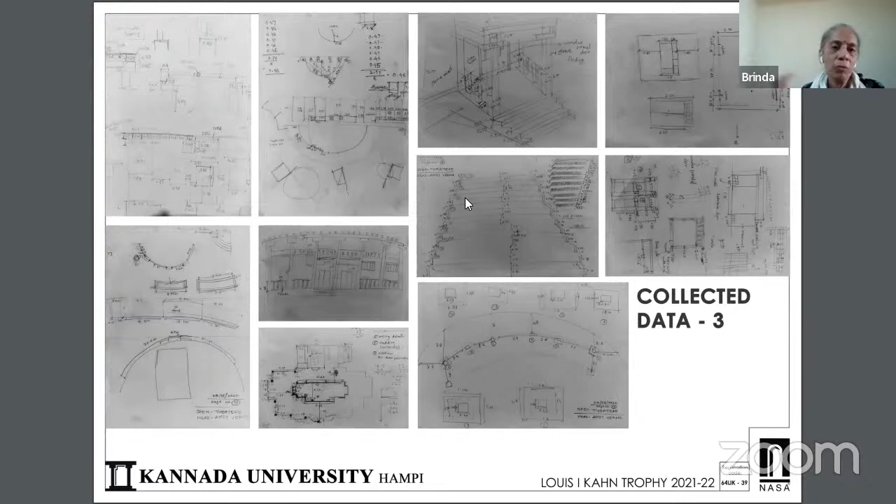Right, so what I was asking was how do you represent that through your drawings? Like, the temple is an institution, so is this a university, but how does it translate? That is something that should come out through your analysis and the drawings. Yes, okay ma'am.

So as we experienced, ma'am, in the university—we stayed there for some days—the mutual understanding or bonding between the students and teachers was of a different kind, as we observe from our local area. The respect the teacher was gaining, or the students were so devoted towards their particular classrooms or the structures in which they study.

They have a different kind of bonding with it. We observed the students clean the surrounding area, clean the interiors, exteriors, and also keep the landscape good. So we concluded that due to the use of local style or tradition kept in the structures or the design process, the same qualities or connectedness to the earth has been kept in the structures of the university, and also it creates a different aura.

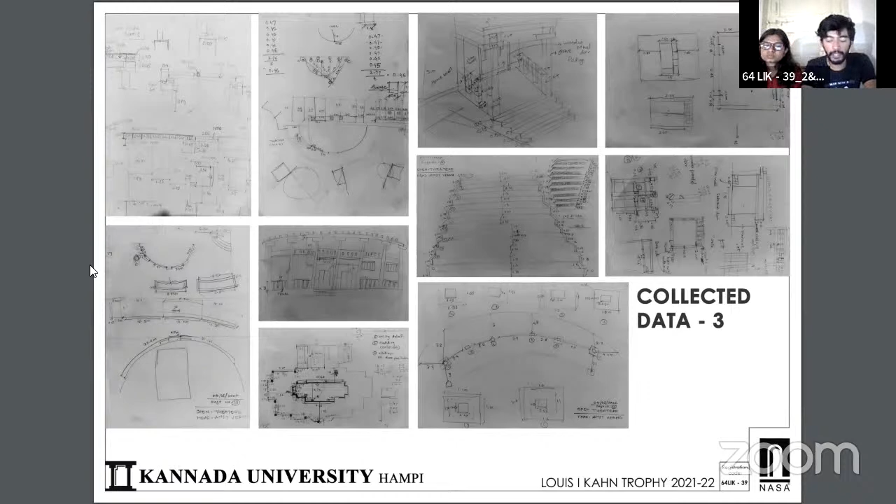Every structure has its own kind of energy, as we visit the temples of a particular style, or Dravidian style, the intricate carvings, or the hugeness of the structures—that can also be experienced in these structures which we have selected, the Kannada University. As we see the images, ma'am, the sheer scale of the structure is observed, and we can feel a different type of aura or energy in ourselves, which we feel in the temples or any traditional or cultural structure present in the vicinity of the university.

That's exactly why I wanted you to study the proportions, the principles of design, because all that does create a certain kind of energy. So you need to also get into that when you're doing this.

You felt it, so you need to analyze it. Get into the depths, talk to the architects, and then go further. Just doing the drawings and studying so many buildings doesn't help. You've done a lot of work, I'm not denying that. I'm just saying, when you feel this, you could just go and investigate why you felt it.

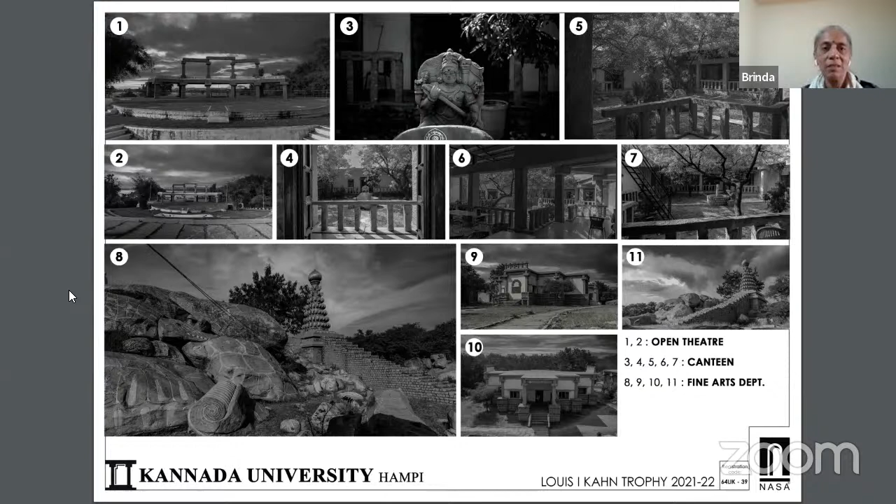Yes ma'am, I just wanted to add that what you're explaining is a lot of intangible aspects, and those intangibilities are hard to represent, but you have to find a way, since you have gone there, and you have to figure out what was it that brought about that ambience that you experienced, and that intangibility. That is also very crucial, because cultural aspects can be expressed through intangible means. And how does it then get translated, or are there some certain symbolisms that are part of the architectural features? So expressing that becomes significant.

And it is science-based, more so because it has been tested over time. We just feel that only the scientific laboratories can talk about science. This is a living laboratory, which has been experimented with for hundreds of years. And here we are only talking about a science which has been experimented over 10 years, and medicines for 5 years, and then we accept that as a science, but not this as a science.

This is something that you need to understand, and you have gone so far, you need to go deeper. Yes ma'am, sure, okay. Thank you, so we'll now proceed to the next group.

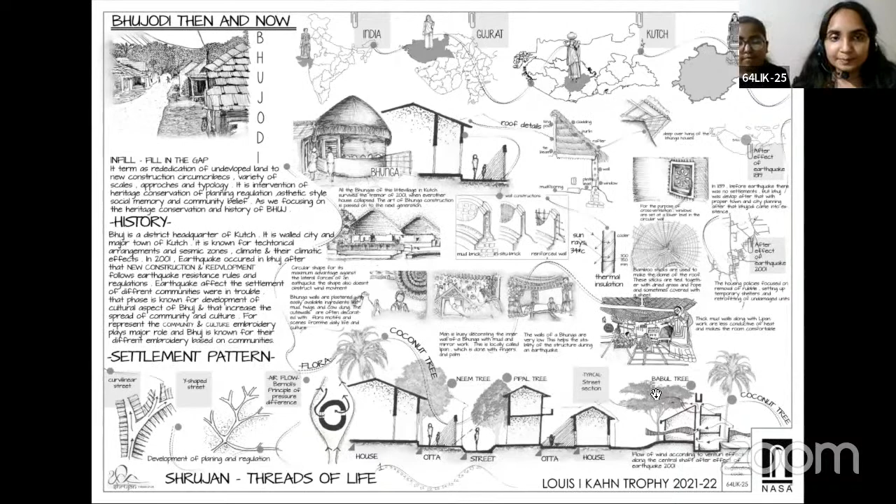The vegetation and the flora and fauna also vary, from coconut tree, neem, peepal, and babul. As said earlier, Bhuj is very much famous for embroidery works. It has mainly 12 communities which work on embroidery.

All the communities have evolved from 1819 to 2020. The evolution has clearly shown that earlier there was very micro work for the embroideries, and now it is more bold and large. The reason we mostly find geometric patterns, animals, and floral patterns in the embroideries.

The reason behind this is migration. People used to migrate, and when they observed things around them, they used and incorporated them into the embroideries. As I said earlier, the embroidery has evolved, but it is still passed from mother to daughter as a system.

The map of India shows the various types of embroideries used in each and every state of India. Now, talking about the 12 communities, each community has various embroidery patterns. The communities include Mochis, Souks, Rabaris, Jadejas, Jat, Meghwal, Mutwa, Meghwal Marwadas, Meghwal Maru, Sodha, Harijan, and Ahirs.

The Ahirs are one of the most prominent communities found in Bhujodi. Most of the embroidery they adopt is embellished with birds, Sakdi Tako, and Bakhyo Tako.

Why Shrujan? The brief stated the infill architecture is a rededication of an urban environment with respect to context, climate, culture, and community belief. The architecture of the intervention responds to context, also evoking desert-type arcs through massive, controlled ochre yellow colored walls.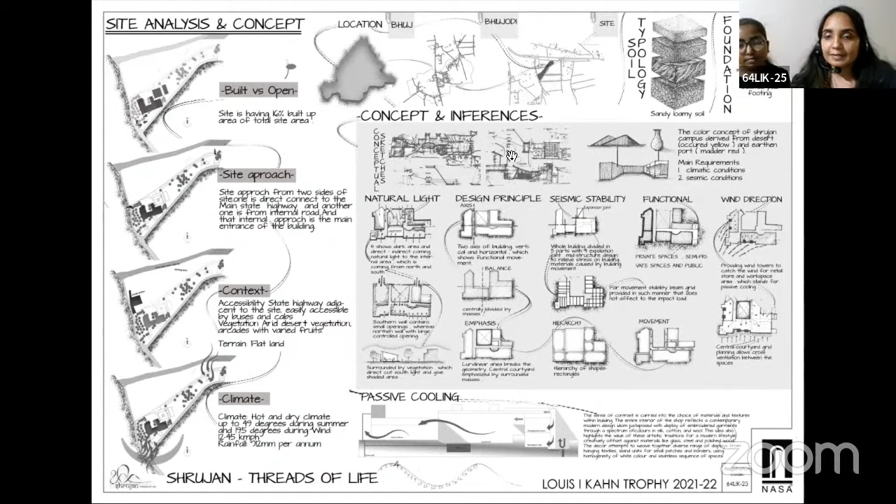The wind direction guided active and passive cooling ideas by providing wind scoops and exhaust fans on the southern and western sides. The site here is 893 square meters, where the main intervention lies on the western side of the site.

The entry is propagated with a lot of vegetation and parking at the entrance. The whole building is surrounded by a huge courtyard, which forms an emphasis. There is also an existing quarters.

Behind the quarters, there is a lot of vacant land left to nature for development. Some of the land is currently used as agricultural land, with the vegetables grown there used in the canteen on the southern side.

On the southern side there is a bhunga, used for visitors or artisans who want to stay there. The bhungas have evolved — earlier they had a conical dome and were circular, but here a porch has been added to the bhunga.

The retail store has a glass facade at the entrance which makes an interesting entry and shows the display. The retail shop and display area are combined together.

There are workshops which are double height and also have a curved wall which provides diffused light. The admin area is located on the eastern side of the building.

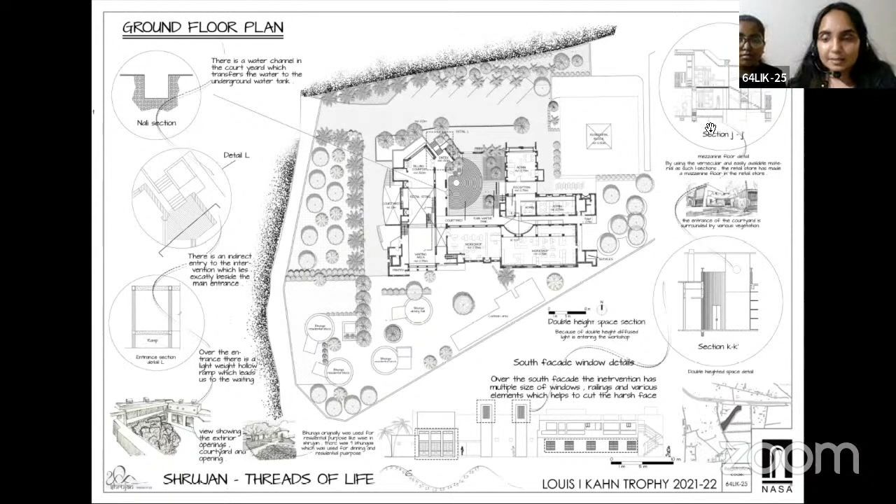There is a mezzanine. As this workshop has a curved wall which provides diffuse light, there is a mezzanine too in this. The ground floor plan has a grid pattern of column and beam placing.

The flooring of the intervention differs from Kota stone, rough Kota stone, gravels, mosaic, and brown tiles. The flooring pattern differs from function to function.

For vegetation, the architects have tried to grow more amount of vegetation to retain the coolness for the building, as the climate there is hot and dry.

To achieve diffuse light, there are other ways also, like providing a small ventilation building which reflects the light, and a diffuse light is provided which is less harsh.

There is an entrance, like there is a wall in the entrance which is a red clay color painted wall, which works as an emphasis on the entrance.

The pathways and the axis, like we can see here, the pathways are the observation and the pause points, which provide visual connections. The movements are controlled, like there is a lot of admin and staff movement. The public movement is gradated from that, and the artist movement is controlled till the workshop.

The axes are, there are three major axes, which also work as the visionary axis, and we can watch everything from each certain point.

As I talked about, the courtyard is in the center, and it has a brick pattern which is very raw here. The first floor has a waiting area, design studio, and fabric dyeing area along with the guest room.

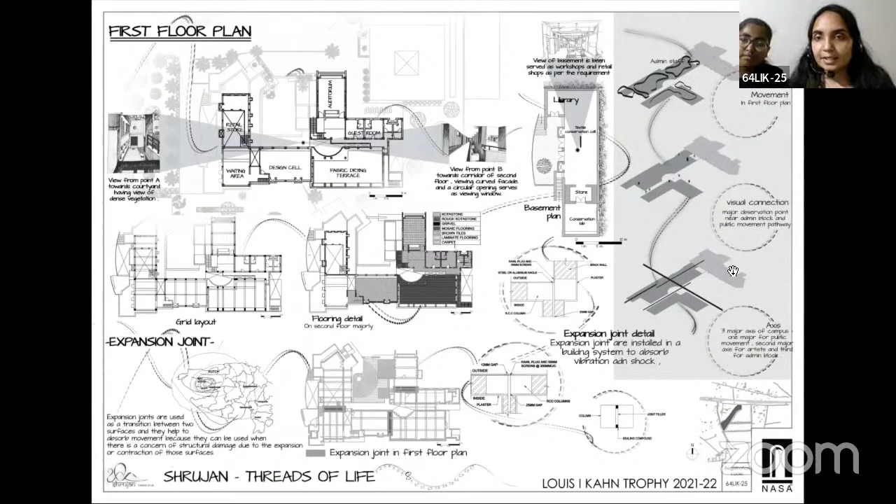The rainwater harvesting is the major thing which we can find, which is very interesting, that the water is being collected from all the different levels of the slabs.

The flooring is mosaic flooring. The water is sent to the chambers, then again to another lower level, and then the water is transferred to the nali on the ground floor, and then it is collected into the underground water, which can be seen here, that the water is sent to this section, then to the chamber here, and then to the underground water tank.

There is also a great, amazing provision of wastewater and plumbing detail.

Please finish this fast. The time's up, so... okay, sorry.

These are the elevations, the northern elevation and the western elevation.

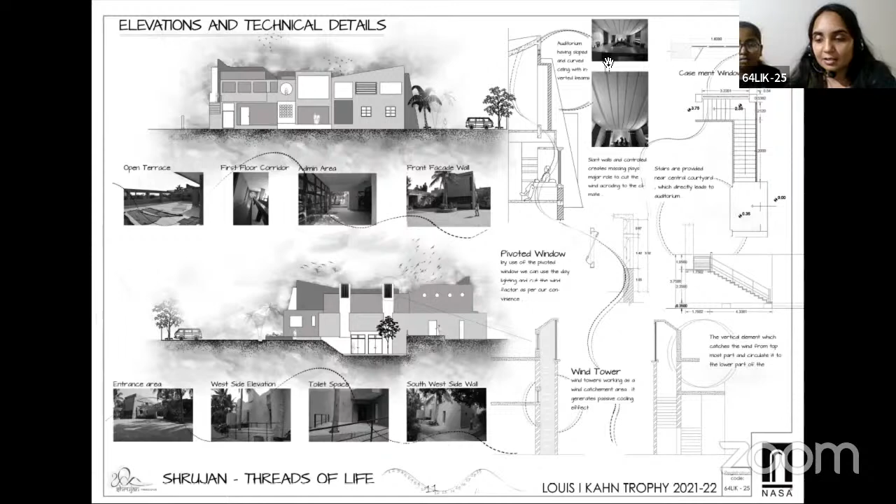They have also tried to do the massing, like to use inclined walls, which work as wind cutters, the wind detail of the wind towers, and the auditorium on the above level has a curved slope, which can be shown in this section, which is here.

These are the details of the water channel and the ramp floorings.

The views which were extracted from the 3D SketchUp model, and the existing views.

These are the on-site drawings. I would like to show the actual process of the work, how it was being worked, the intervention, how it looked, how spaces worked, the red wall, the retail shop, the flooring of the courtyard, the rainwater harvesting with mosaic tilings.

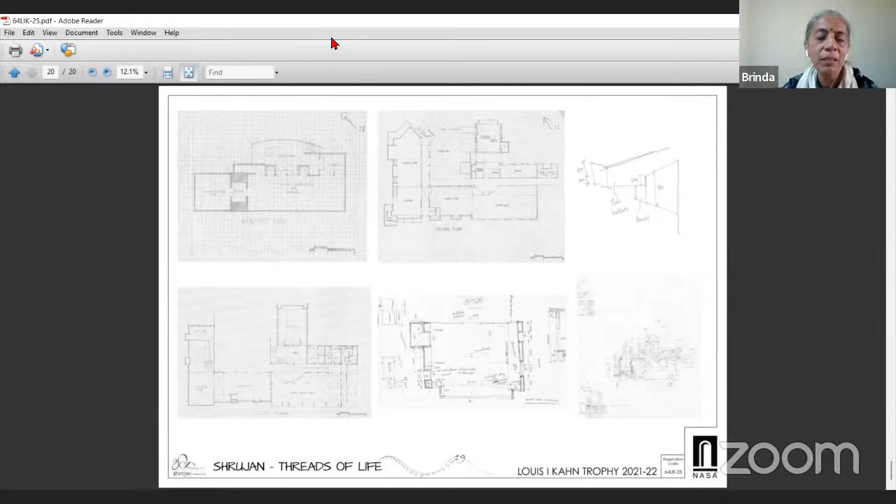Definitely the water system, you really brought it out clearly this time. And use of the spaces, like each of the spaces within, how are they programmed and how do the people actually use the space? This is the question I'd asked even earlier. So that would be also useful to analyze.

Are they wind towers, wind catchers, or exhausts? Ma'am, there is a combination of towers and exhaust fans together. Agreed, but they are catchers, it can't be in the same tower. Yes, catchers, they are wind catchers. Okay, then they're in the right direction.

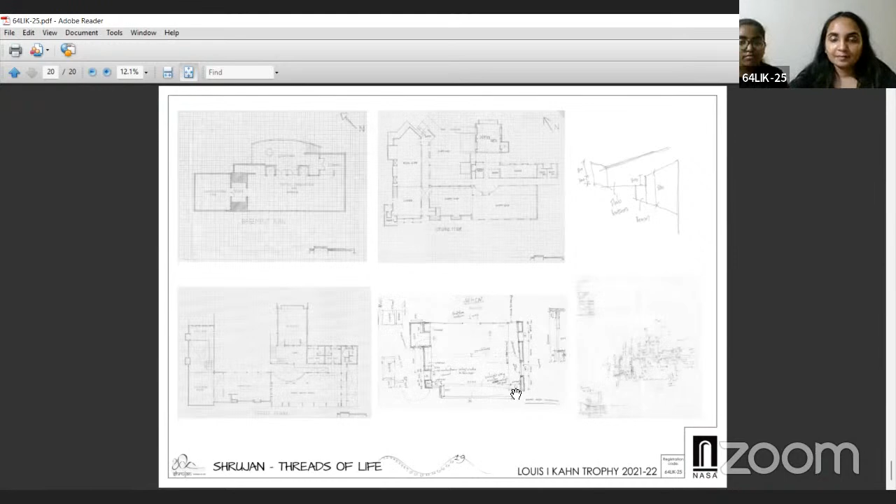Well, I have nothing else to add besides whatever we had commented last time and whatever the other jurors have said. There's nothing more to add. Your analysis was good, but you need to connect it with the building.

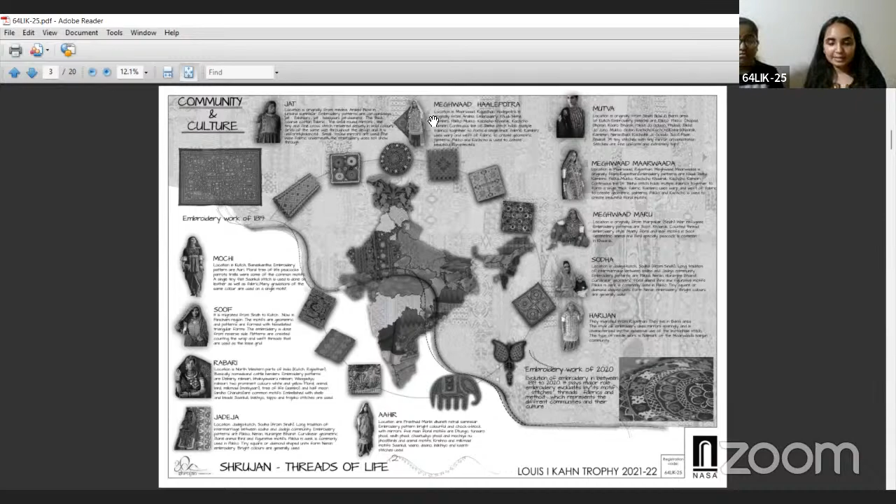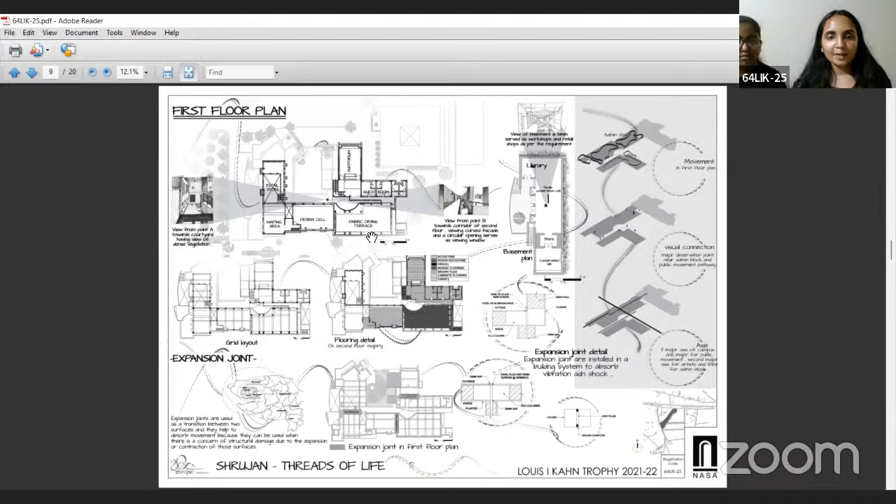The spaces are working like the ground floor has more public accessibility rather than private. There is this retail shop and display area, then there is the admin area in a different direction, and there is the centralized workshop so that people can examine. Even when we went to the intervention, we examined how the work happens there. On the first floor, there is totally a private place which has an auditorium which is only being accessed by the public, and there is a designing cell and other things which are private and can be used by staff members, which you explained already.

Yes, ma'am. Let's not repeat it. Okay, yes, ma'am.

Just wanted to say something. Often in these trophies, two schools, not knowing what the other school has chosen, end up choosing the same project. Wanted to assure you, and the Hilltop School project also has been done by two students. In case if they're listening on YouTube or wherever, I want to ensure you that the fact that you are the second to present makes no difference to the jury. The jury will look at each student's work not on a comparative basis, but on an absolute basis to see what the work is like. Just want to assure you that.